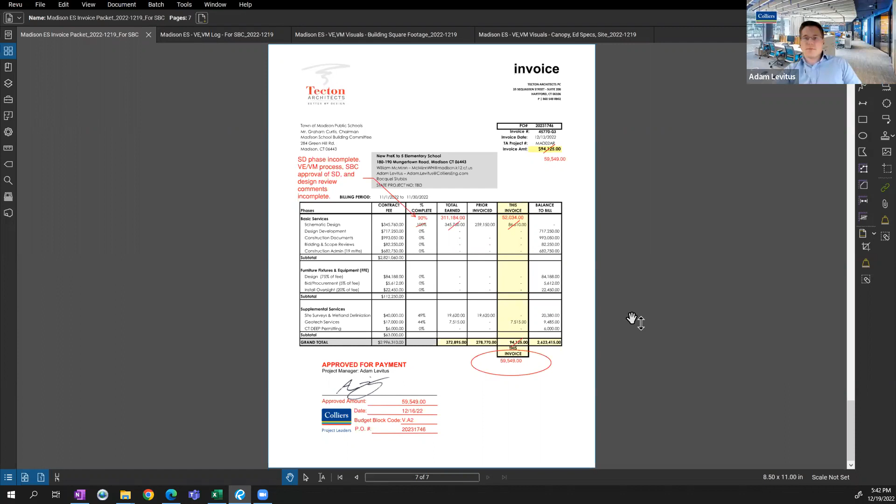Adam, why was the amount approved lower than the amount applied for? That's a good question. So with Tecton's bill, their accounting staff originally billed out 100% of schematic design, but we're not all the way through schematic design yet. I spoke with Justin last week, and we're approximately 90% of the way through. So that's why the amount submitted was different than the amount approved, to align scope with completion. Great, thank you.

Do we have, would someone like to make a motion to approve? Is George here? George, where are you? We need a voice. I'm here, but I don't have the draft. I'll make a motion that we approve. Oh, I have it, I can share the screen now if you want. Okay, Woody, go ahead.

Once you stop doing that, I'd like to make a motion to approve the invoice packet dated 12/19/2022, including invoices from Colliers Project Leaders and Tecton Architects for a total approval of $76,274. Do we have a second? I'll second it. George, beautiful. All in favor? Aye. Aye. I think that was unanimous. Sharon, did you raise your hand? Yes, unanimous. Okay, great. So with that, I guess we'll double back to the OPM update.

You guys are gonna tag team this? Yeah, so this basically is just, there's not much of an update—it's just the schematic design and value engineering and management review.

The ultimate goal of this exercise is to move from schematic design to design development. The two tasks that comprise that include confirming that the concept behind schematic design, with any of the changes discussed, aligns with the town's needs and conforms with the education specifications—that yes, this is the project we want to move forward with.

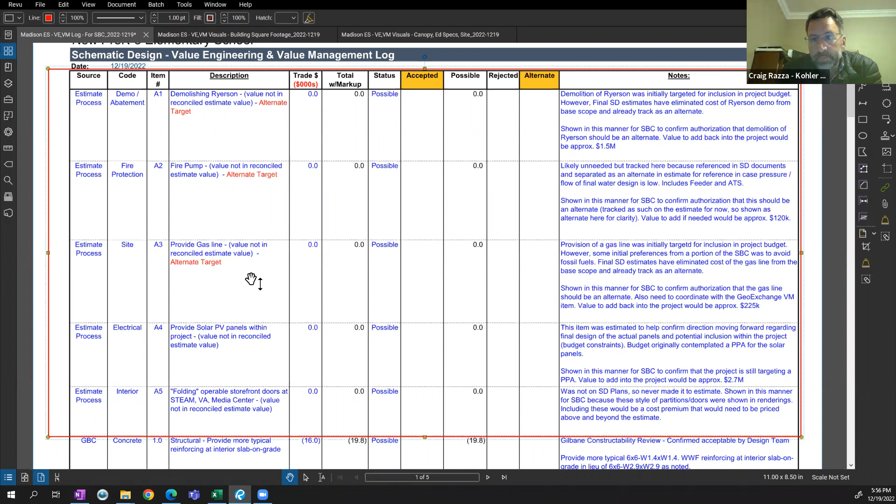Thanks, Craig. Also on these five, otherwise I'll allocate them accordingly. We can move on to the other VE items.

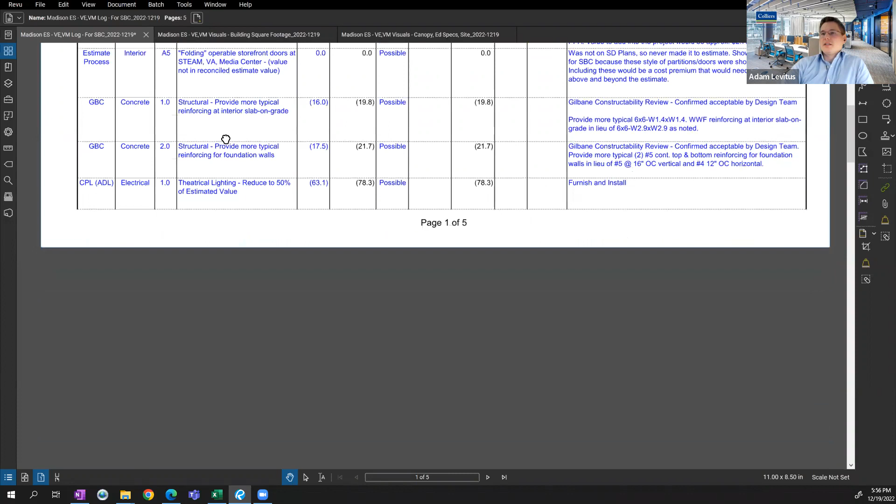So the first item to take up is this couple of concrete items and an electrical item. For concrete, there were some constructability comments from Gilbane that some of the reinforcing in the plans was a little more robust than they typically see. Tecton indicated that was probably the case, so this was a fairly safe value engineering item that could be taken just on reinforcing within the concrete standpoint, in the slabs as well as a similar comment on some of the foundation walls. Any questions on those two?

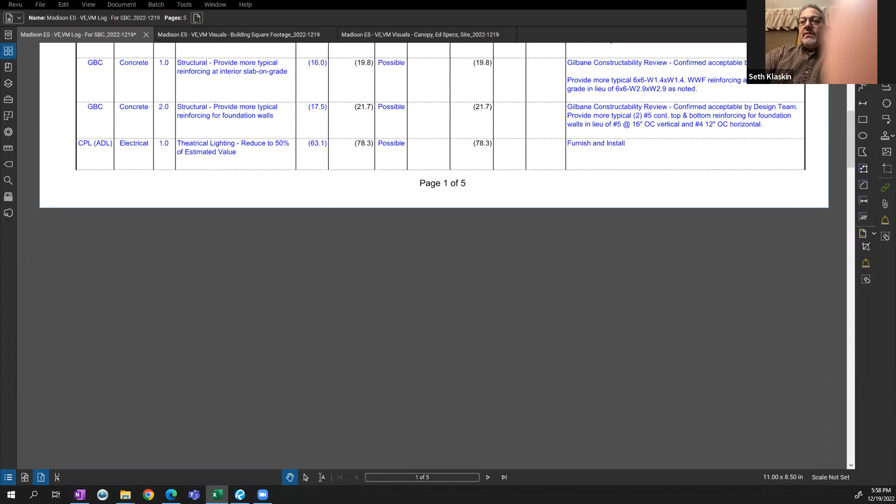The board did at its last board meeting entertain a discussion about the potential for opening up and potentially amending or revising the ed specs. While I'm sure the board would still be willing to do that, I think we'll need to take a wait-and-see approach until some of the town leadership talks in the coming couple of weeks, to see where things stand, because through some of the things Graham hinted at, and maybe some other initiatives, there may be a way to close this gap without hitting the ed specs. So if we need to hit the ed specs, I think the board would be amenable and probably able to move an action item in time to address that need. But until that's clear, I don't want to overcommit the board, because there may be new information coming that we were not privy to during our discussion.

Absolutely, 100% agree. That's why we just preliminarily came to you. Well, any thoughts on the radiant flooring?

I know there was quite a bit of discussion. Do you guys have a consensus on that? As far as I'm concerned, as of now, everything that has already passed as ed specs by the Board of Ed, that's our ed specs. And if that includes radiant flooring for younger kids who spend a lot of time on the floor during lessons, then that's what it includes. I'm not so quick to dismiss that personally, but other board members may feel differently. Either way, we would have to have a BOE vote on that, and the same thing on square footage of kindergarten classrooms, for example.

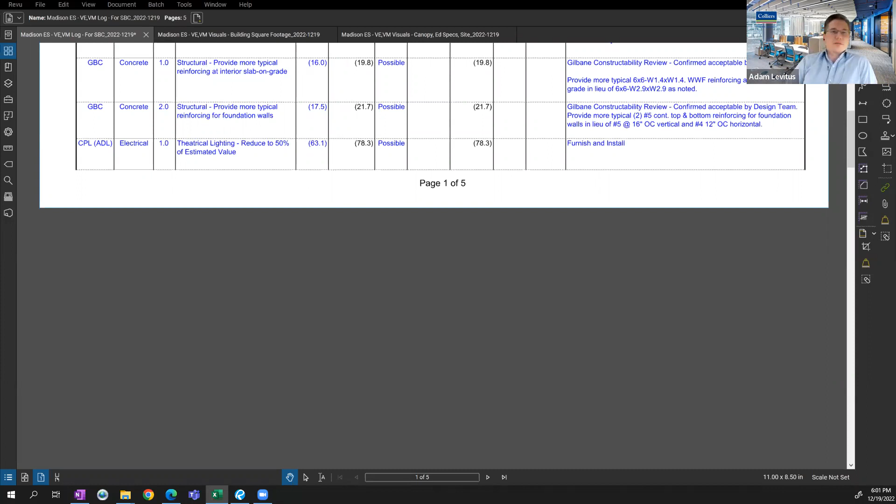And just to piggyback on that, the way this may work depending on timing of meetings is an understanding from the SBC where if any value engineering items were to be contemplated, there could be a conditional amendment to that vote, conditional upon BOE approval of those specs. That way it's clear and we're not just going back and forth between committee meetings for weeks and weeks. Ultimately this is timely, so getting Tecton direction to move in one direction or another with the reduction in classrooms or not is important. But to Seth's point, the ed specs can't be changed without BOE approval. So getting those ducks in a row and making the appropriately worded motions is a good mechanism to ensure those sign-offs are made without anyone being circumvented in the approval process.

Anything else on that before I chop that to the list? Nope, I'm good. Thanks, Seth.

All right, so any questions on those two concrete items? Otherwise I can list those as targeted for acceptance unless there's exception.

Next one is a theatrical lighting item. The theatrical lighting value in the reconciled estimates was in the neighborhood of $120,000 of trade costs. So the idea would be to target the design to 50% of that value. There's not scope to cut necessarily at this point, so the design would contemplate approximately $60,000 worth of lighting.

Questions or concerns there? I guess the $120,000, it's an elementary school, so I assume that reduced number is suitable theatrical lighting for an elementary school. Correct, this is Justin from Tecton, yes. Okay, good.

Next, another constructability item where there was some rigid conduit noted in the design documents. EMT tubing was a little more typical and cheaper, so that was an item brought up by Gilbane and acceptable to the design team, for mechanical spaces and that kind of thing. Hearing no questions about that.

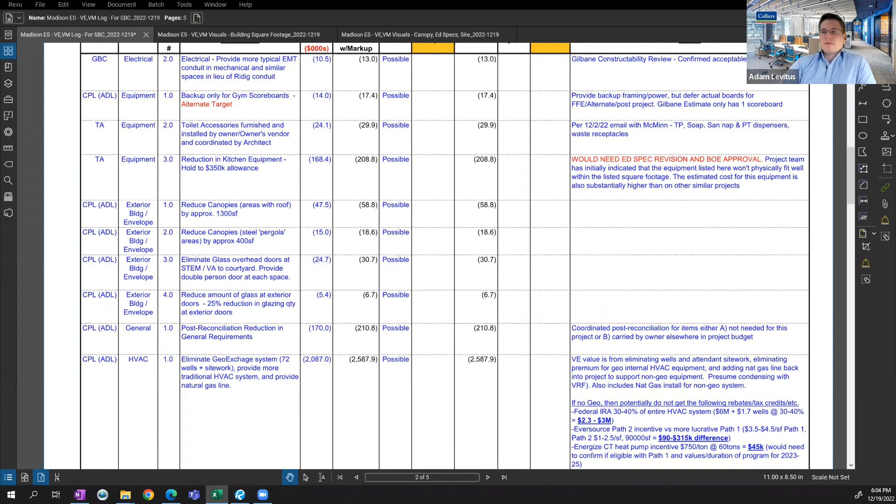Sounds good to me. Okay, I'll put that in the alternate category.

This next one is coordination between myself and Bill McMinn about some of the toilet accessories, dispensers for soap and paper towels and things that are often vendor specific rather than designed and provided for through the project budget. Bill indicated that a number of items would be going through the town anyway, so wouldn't be part of the construction budget itself. So this item is more a clarification rather than a value engineering item of where the monies would be coming from for this scope.

Questions there? No? Okay.

The next one would be one of the four that would involve potential ed spec revisions. This is for a targeted allowance of money for the kitchen equipment. The ed spec had a number of components to the kitchen equipment. Let me see if I can pull up the ed spec for this.

I don't know how well - you should be seeing the ed specs now. Is that correct? Yeah, correct. So all of these items were listed in the ed specs, and when it was priced out, it was a little over $500,000 worth of equipment.

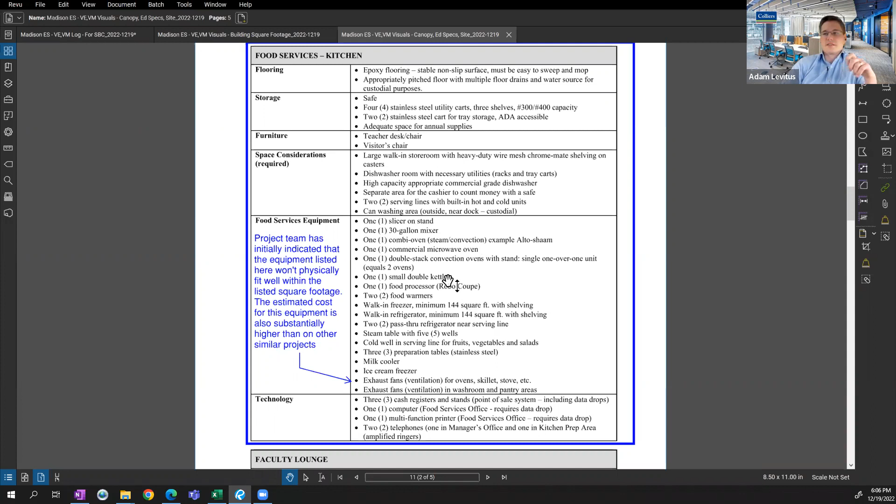On similar recent projects, $350,000 seemed to be a better target for the amount of equipment that would go into the job, and that shown through in some of the estimate reconciliation processes. So that is the target for this value engineering item - basically to save on the difference and design the equipment to match that budget, which would be done in concert with town facilities and town staff. But again, ultimately would change the ed spec in terms of what would be provided.

Is there a cost difference between induction cooking equipment and gas-fired cooking equipment?

That might be a better Nick question, or Jeff or Justin question. Not 100% sure on that, Graham. I can look into it and get back to you.

Got it. If some of the equipment won't fit anyway, we have two problems. So besides the ed spec, we have a physical 'this won't fit' problem, don't we?

Yeah, I think we're probably going to take this one unless someone - if the kitchen, I assume we have a kitchen consultant on the team. We don't know. Yep, I don't know if they've weighed in. I assume they think the reduction is reasonable for an elementary school of this size.

The answer is yes, they've been involved in the value management. They understand that it was an awful lot of equipment to fit into the space that was given, and they think they can design a performing, operating kitchen with less equipment.

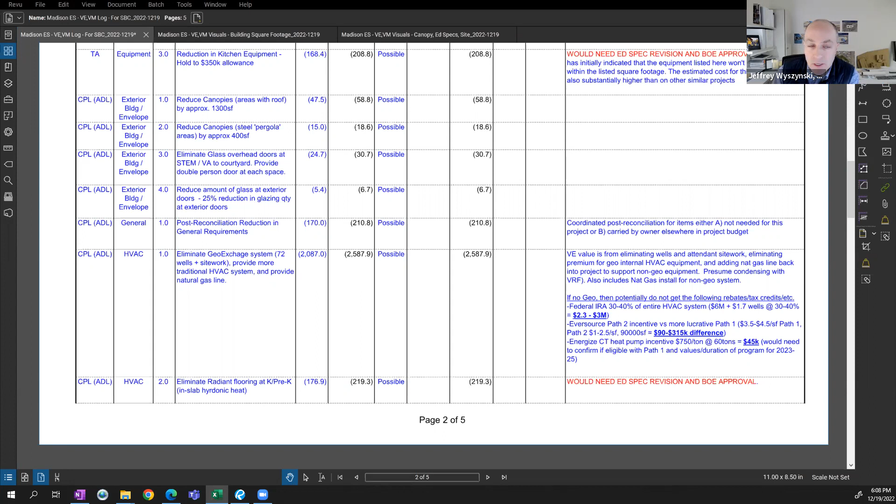I think the budget numbers were sourced from a variety of different previous recent projects that were similar size. That's why we came up with the 350. Perfect. Yeah, the origin of the kitchen list in the ed spec was a pretty detailed list.

And it is amongst our next steps to validate this with the kitchen food service folks in the district. So that's something that's on our radar to schedule and validate with Bill and his team.

I have a question - is there any reason we can't move any equipment over from Jefferson that we already own? Does it all have to be brand new?

I mean, I don't know if you know. I can answer that. I don't think - the equipment that's there is probably some of the original stoves and stuff. Now we have been taking care of it and maintaining the equipment, and we fix and repair it all the time when it's needed. But I just don't think that's an option we'd want to do.

Plus it's gas, right, Billy? Right. Yes, a lot of it was propane. We did put gas there - I don't know if we converted it to natural gas, but it's originally been propane.

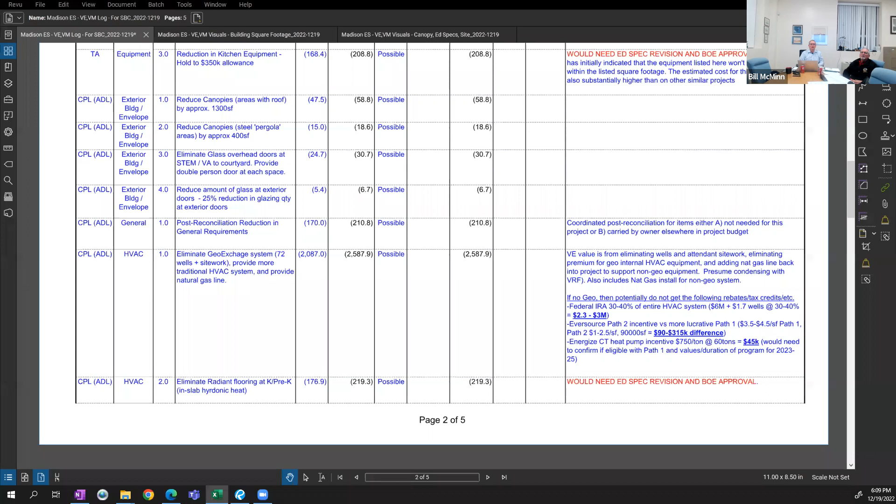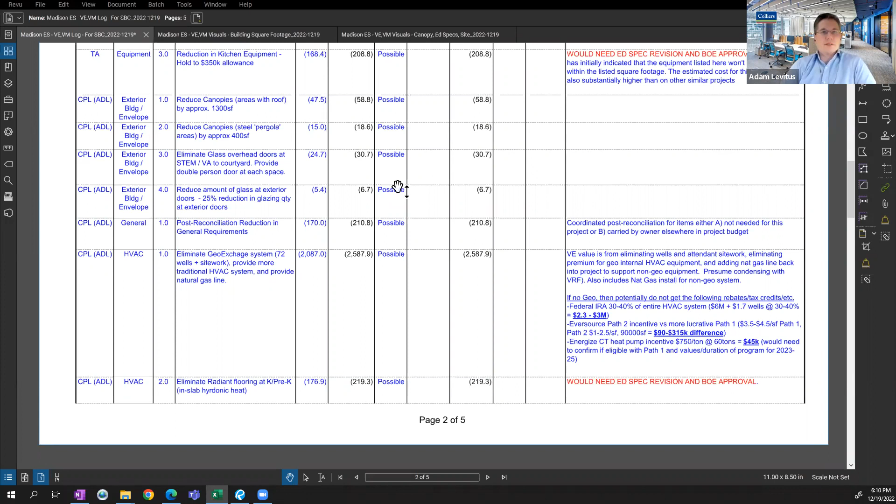Is there any exception to this item from this committee standpoint? This item would need some coordination with the BOE as part of the ed spec potential changes. But from a value engineering budgetary scope standpoint, is there anyone with any exception to this item? Otherwise, I can flag it as accepted, and it would need to be coordinated through the BOE separately. I think that's a good direction. Yeah, yep.

Very good. The next item, or two items, are with regard to reducing the amount of canopies. I'll share a quick visual here to help with this scope. So everywhere in the blue shaded around the building is some fashion of canopy or sunshade.

Tecton took a look at what was originally estimated and identified about 1,300 square feet of solid canopy, and then 400 square feet of more pergola type canopies up in the front that might be eliminated, both because it can still work without it, as well as just a cost saving effort. So this is where that targeted area was that related to those two savings items.

If I can add, Adam, this was actually a design element that we had already incorporated by the time it became a value management item. We develop our drawings up to SD and then go through a period of cost estimation. As we were continuing to work on the design and the project, this was an item that we had already incorporated. But it's an item that has been identified as part of the value management, so we recommend you accept this item.

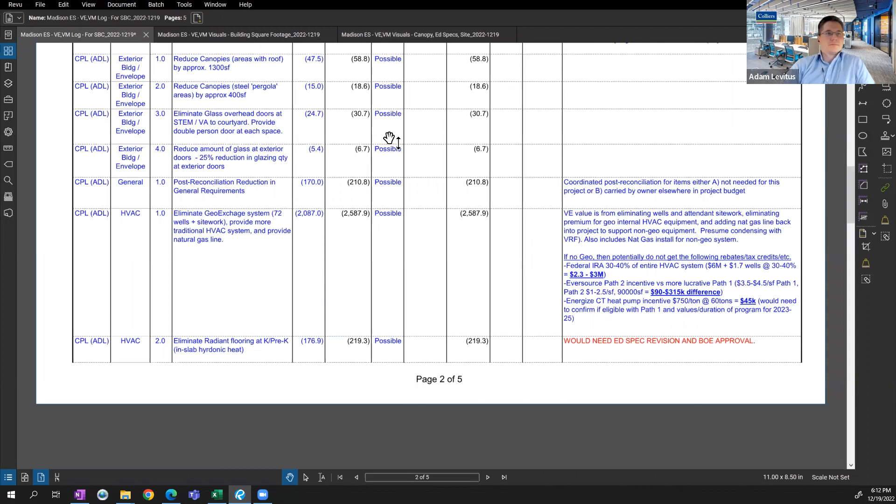The next item is glass overhead doors at the STEM and the courtyard, replacing them with a double person door at each space. Originally anticipated at these two areas was a sort of a roll-up door to facilitate access to the outside. This VE item would maintain access to the outside through standard double doors to get out in each space rather than having the premium overhead roll-up door.

Questions on that? Concerns? Would that be an alternate? If the architects feel strongly about it, it's a nice feature, but let them identify if it's something they want to design or not. Probably don't want to draw it twice though. I mean, it depends if they feel strongly about it. Was that item in the first five items too?

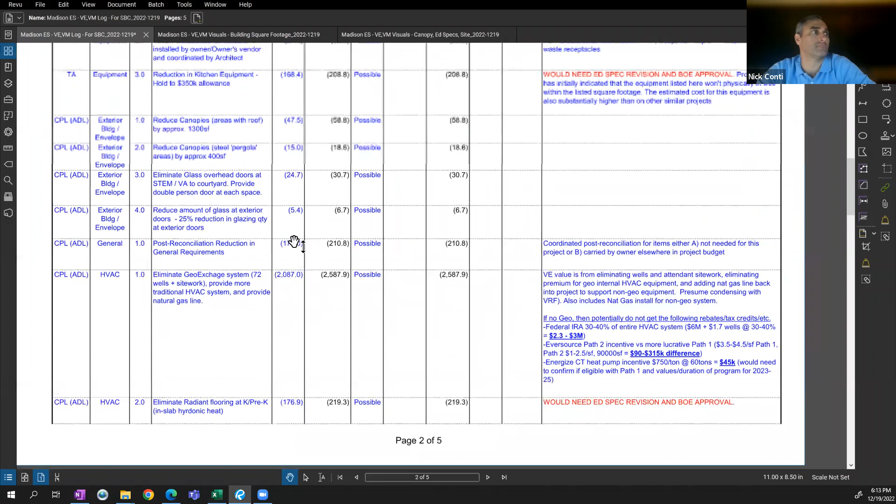Yeah, Adam, if you go up to item A5. That was a different one, I think. I'm sorry, I see your point. So this current B item refers to these two. Item A5 was at these two locations where the SD drawings just showed storefront, but some of the later renderings that came out right after SD showed the full bifold doors to open up the spaces. That's what A5 was. Got it, thank you.

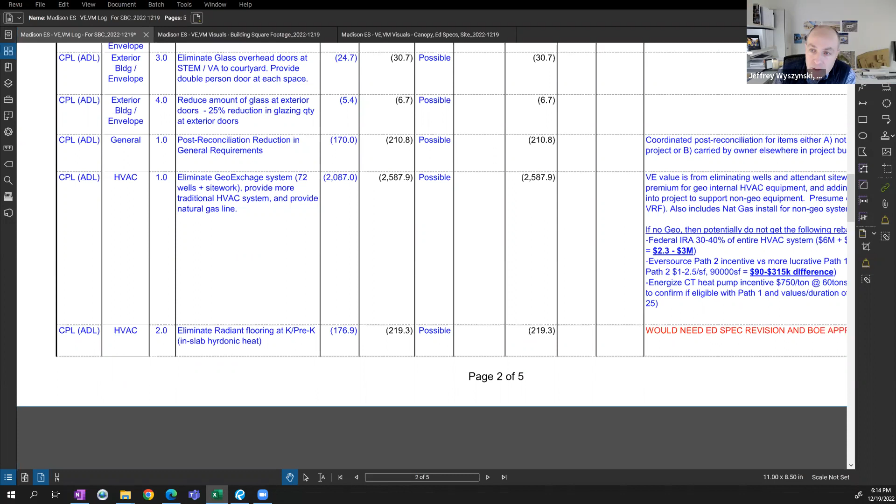Any other questions? Jeff and Justin, do you want to talk about it being an alternate, or is that something that should be taken sooner rather than later? It certainly could be an alternate. It's easy enough to change the function. We can talk about that later in DD, but for now, moving ahead, we'll just show it as doors as a VE item. Works for me. Yep, okay.

The next item is reducing amount of glass at exterior doors. This is one of the first of a number of items where there was a targeted reduction in percentage rather than a wholesale elimination. The notion was to not completely gut the building of every single window and finish. Some items are more extensively taken; one of the later VE items is a 100% elimination of wood ceilings. But obviously, having zero glazing at your exterior doors isn't nice to have. So you'll see a number of these with a percentage basis to try to offset square footage reductions, having a smaller building with nicer finishes versus a larger building with nothing in it.

Justin, it's an awfully small number, isn't it, to worry about at this stage?

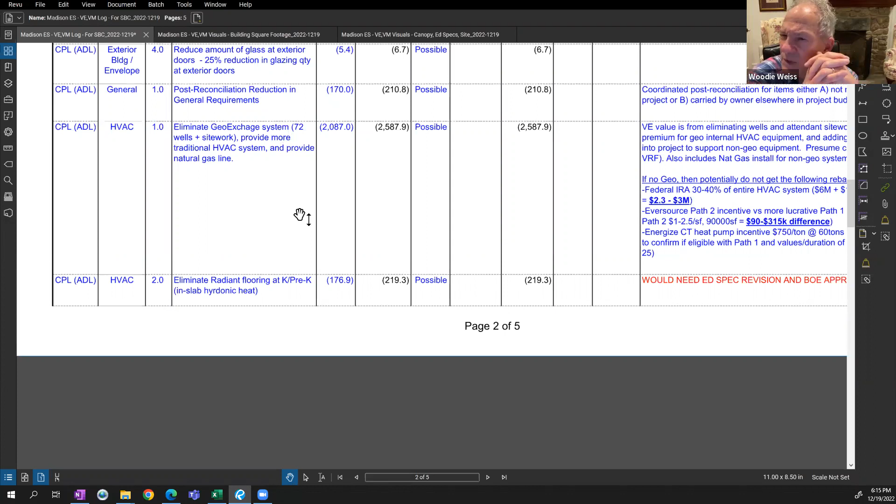Justin, can you talk about what glazing currently is at the doors? Yeah, it's a matter of each door basically having a storefront type door that more or less has a full pane of glass within the door and side lights. There are some select exterior systems, perhaps on the north side of the building, that we can economize. We can also incorporate perhaps a

larger bottom stile in the doors and in the side lights. So this is something that, frankly, as we move forward in design development, we'll have more elevations to evaluate this in. So it seems like an easy get, something we'd likely be doing anyway. We didn't know the cost value when we developed it, and it came through at a lower value than we thought, but that's why it's on the list - we didn't want to start taking things off just because it was a smaller value.

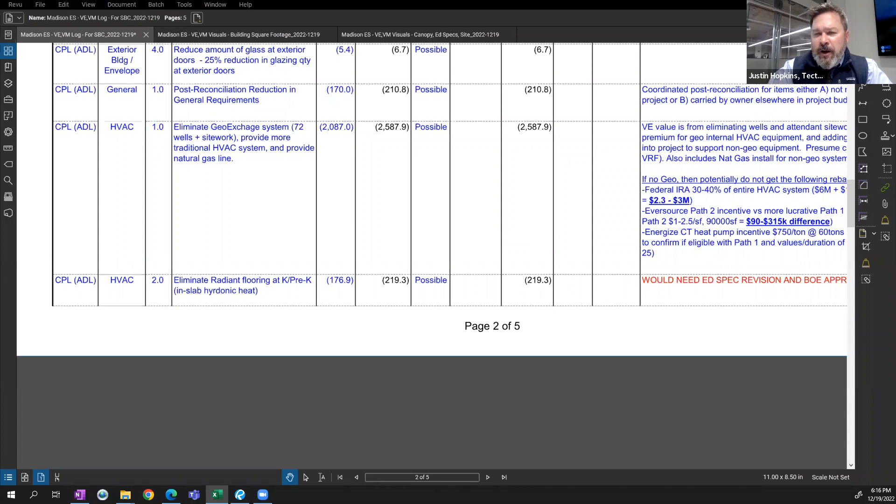Does this reflect ballistic glass or security glass premiums? Well, certainly any glazing that we have at grade and at doors is going to have an additional enhanced glazing there. So I think this is more about reducing the size of glazing so that you can then reduce the cost associated with it.

Yeah, I understand. I just wondered if it was a premium, would there be more savings if it were priced as a premium. Yeah, that number might be a little bit low - 6,700 for ballistic glass, 25% reduction. We can take another look at that. Thanks. What I'll do is leave this one as possible, and since we have to come back anyway, we can see if there's a reconfirmation of that number.

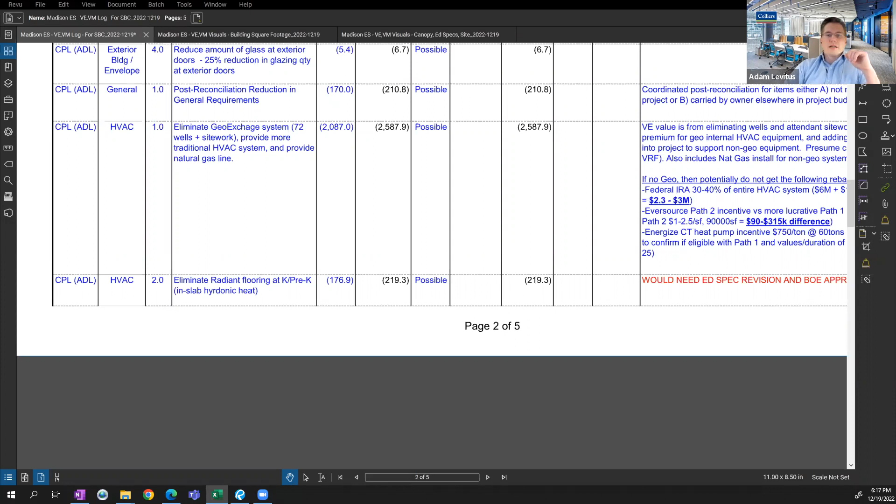All right, next item. So this one should be fairly simple. There was some general requirements identified in the estimate process. This reflects a lot of the administrative stuff that Gilbane will incur as part of running the job. So Nick and I took a look at it, and there were a number of items that either didn't need to be applicable to this project site or were carried elsewhere in the budget on the owner side of things. It just happened to surface after the estimate reconciliation. So that's what this line item is - there's no change in programming or scope, it's more or less just identifying where savings is coming after the reconciliation number.

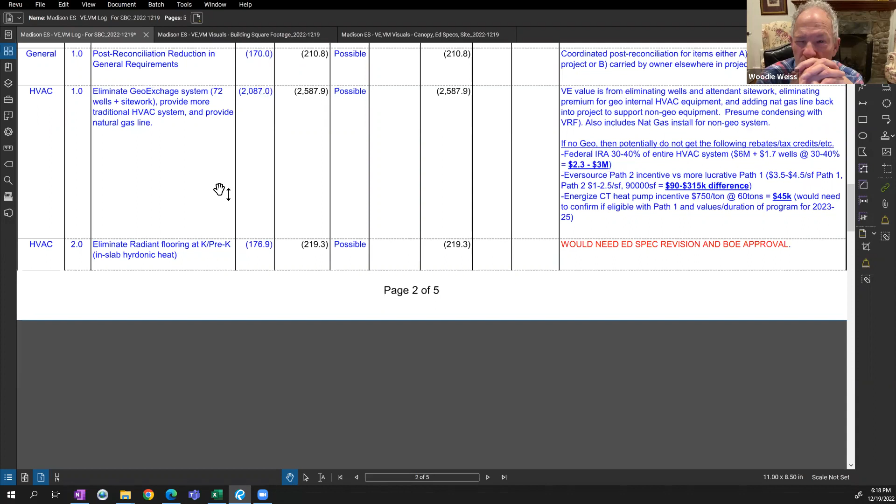You get any more like that? If you got a few more like this, Adam, feel free to throw them out. I would love to, but I don't think Nick would be too happy if we do more of these reductions. Any questions on that? Otherwise, I'll move that into the accepted column.

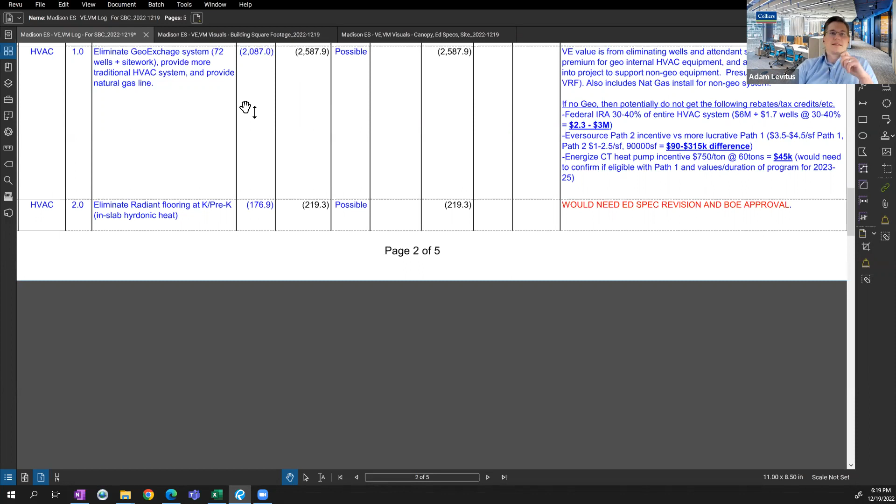Okay, our first big one here with the geothermal. Obviously there's later discussions coming up insofar as potential budgetary items, but from a very high perspective, this number contemplates eliminating the wells, eliminating the attendant site work, the manifolds and piping going to the building, changing over the internal HVAC system units to a more traditional system - those are the savings portion of it - and then the putback includes the value for the natural gas line to feed a more traditional system.

The other side of the coin to this is if this number, which is a big number, is taken, that would eliminate a lot of potential for grants and things coming down the pipe - several million dollars if the programs from the federal government and Eversource hold true. So that's the crux of this topic: whether or not the project can have sufficient funding within it, or within the overall referendum budget, to get the additional monies to help support this project value, or whether that's not possible through bond funding and would need to be considered as a VE item. Adam, I think it's important to have the IRA money indicated as a rebate rather than

a grant - it's not a grant, it doesn't have to be applied for. And I think that's a real difference to people that do grant writing, who say oh, there's a lot involved there and maybe we won't get it. This is not something, as we discussed in our last meeting, that there's any ambiguity about any longer. Therefore, I think we should say to people: the differential between a conventional system and the geo-exchange system is zero or very close to zero, because the IRA is a definite. And if we use American-made equipment, then we can bump the 30% up to 40%, and then it's cheaper than a conventional system - to say nothing of the fact that it would save 60% of the expense of operating the system compared to a conventional system.

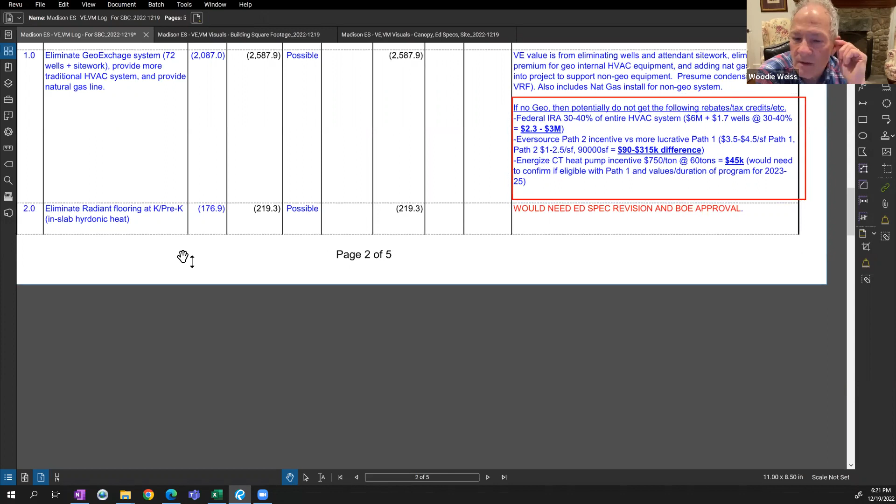I hope the meeting tomorrow goes well. Obviously I'm very hopeful that it goes well. If it doesn't, I think we need to think as out of the box as possible to get people to recognize that it is, in my opinion, totally irresponsible to not put in a system that the federal government is willing to pay us for, to make the cost the same or similar to a traditional system that has the benefits I've just outlined.

And there's got to be some way, pull other stuff out, do other things. I'm sure you're expecting this kind of response from me, so it's not a surprise. But if tomorrow's meeting doesn't go well, we shouldn't be taking this off the table so quickly. We should really, really exhaust every possibility and see what else is available to do.

By the way, Craig, we're talking about more than 60 tons here, aren't we? That number I just pulled from the narrative that I saw within the estimate. So it might be, in which case that number would go up. This is intended to be just approximate values.

Obviously, we haven't applied for the rebates yet. I don't think though, if you get one incentive, you can't combine the other. So if you go for path one, everything is in that incentive. I don't believe they incentivize again.

Right, that's why I have this little note here. I wasn't sure what the result was, but point being, to Woody's point, the federal money is multiple millions of dollars, and we know through Eversource conversations that path one is somewhere between $90,000 and $315,000 more than if we went down path two without geothermal.

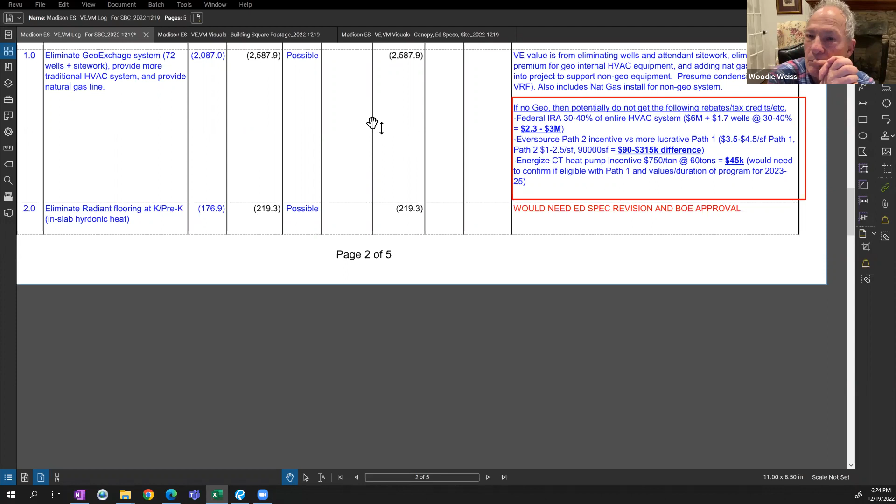So obviously this topic is not going to be resolved tonight, but just as a point of note moving forward, maybe Craig and Jeff can talk about this as well. This is important to resolve before we move headlong into design development or the rest of design development. We can't sit on this with a wait-and-see approach until construction documents and then find out we have to change the entire mechanical system and all the distributed mechanical rooms and redesign everything.

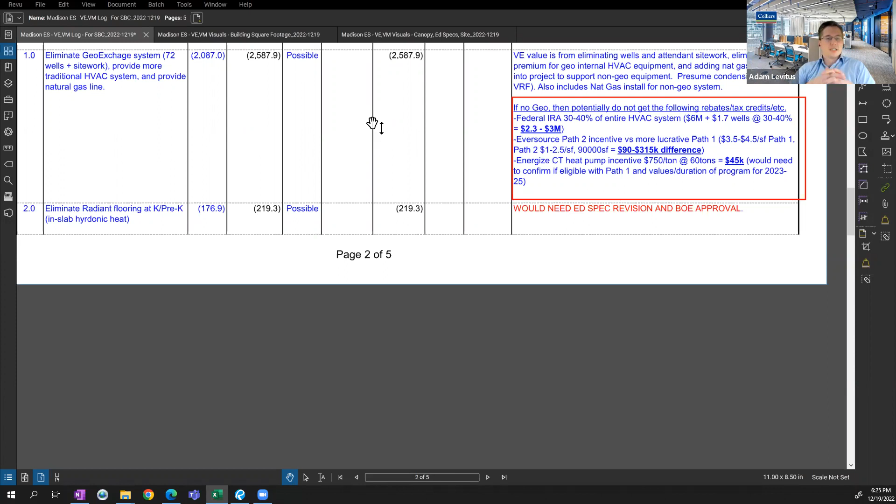That is 100% correct. You're not designing two buildings for the price of one. No. Understood, we got this — this is a critical path.

All right, unless there's anything else on this topic, we can probably move on to some of the other ones we can review. I'd like to make sure, and I don't want to slow you up Adam, that the other members of the committee and any BOE members understand what we're dealing with here and why I'm so obstinate about it.

I'm crystal clear, Woody, after working with you for 5 years. Yeah, I didn't mean you. But anybody else, and for George likewise, is crystal clear. I don't know if anybody else is unclear, but I will make an impassioned plea tomorrow in your case, Woody. But no need, everyone knows — you've preached long enough to Madison. They, everybody in town, understands the issue here.

Okay, thank you. We'll do everything humanly possible to go above and beyond whatever we need to do to make this happen. So.

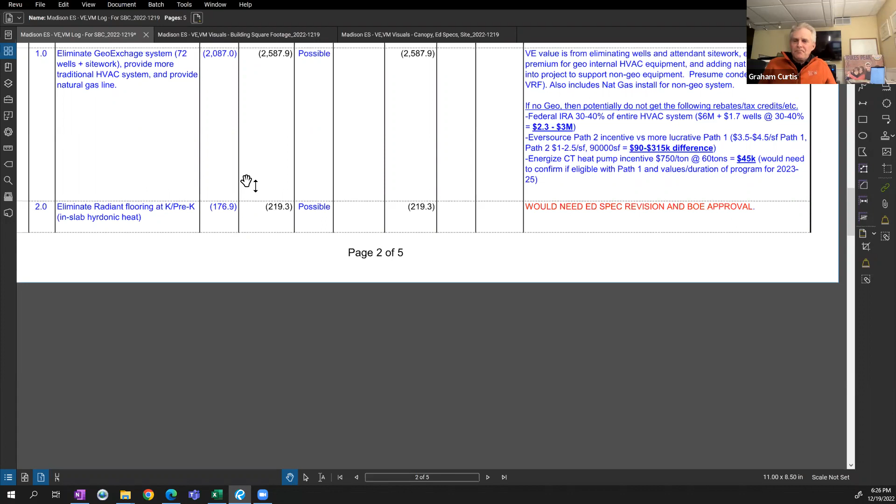Okay, next item, which is actually one of the 4 items that would be an ed spec revision, is the radiant flooring at the kindergarten and pre-K areas. Basically, it would just be heated through the normal system rather than the in-concrete slab radiant hydronic system. That would be a couple hundred thousand dollars worth of savings.

Well, I agree with Seth about that personally. I mean, obviously, if we're out of money, we're out of money and we do things, but having those kids sitting on a concrete floor, expecting hot air to go down instead of up doesn't make a lot of sense to me.

It is just for the younger grades, correct? Kindergarten, yeah, pre-K and K, yeah. Correct. Correct.

Okay, I will, because this is also one of the BOE items, and there's a little bit of uncertainty about this one. I'll just keep this one as possible, and we'll revisit this when we come to the later meeting. Perfect. All right, moving on.

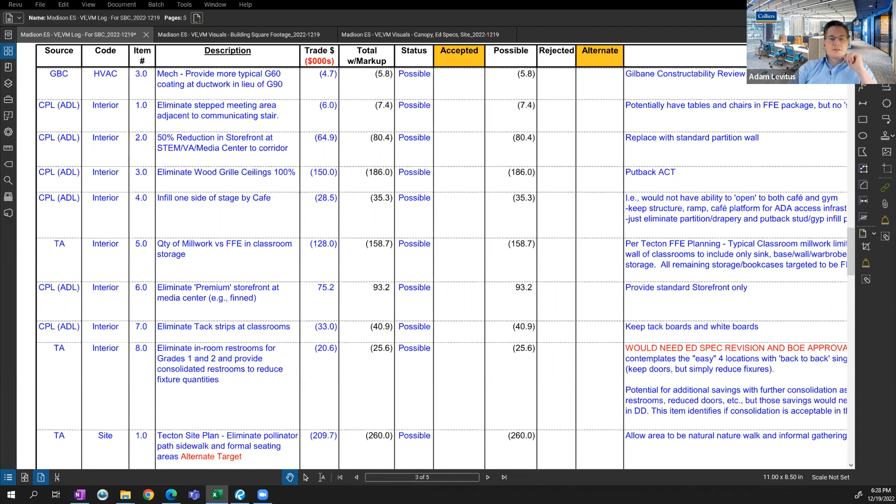I'm good. Next, this is an item. It's a little bit smaller, so this one might be a little more scrutinized. This is for the stepped seating area adjacent to the communicating stair, the actual stairway to get down from the upper floor to the cafe area. What we're talking about here is this millwork area, with larger steps for students to gather and sit. The number isn't quite as large as I thought it might be when it was originally suggested. So the alternative would be an FF&E solution, but that's up for the committee's consideration.

I like the feature. I have some question if it's an ADA issue, whether people in wheelchairs can't access it, but that's a separate kind of issue.

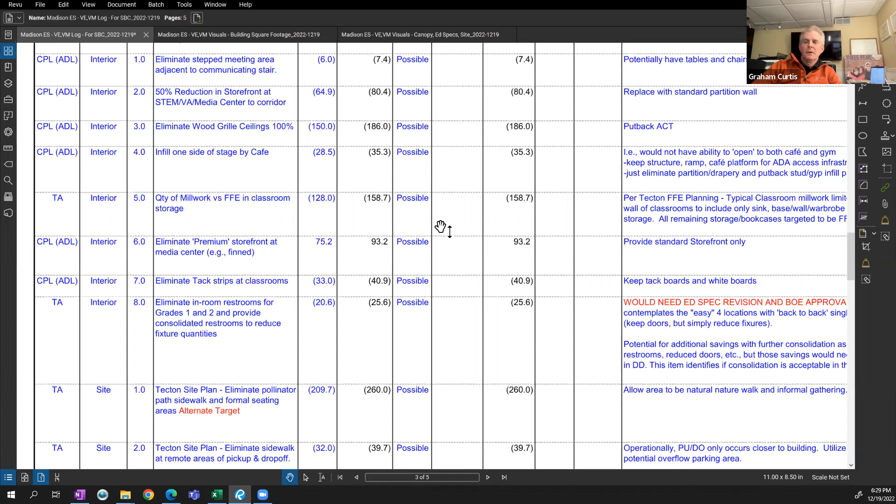That's Justin, do you have thoughts on that? Yeah, I mean, we design these types of communicating learning stairs in a lot of our schools, providing accessible seating area or accessible areas at the bottom of the feature is an acceptable ADA solution. We just need to make sure that we have designated areas for wheelchairs to be able to be part of that assembly.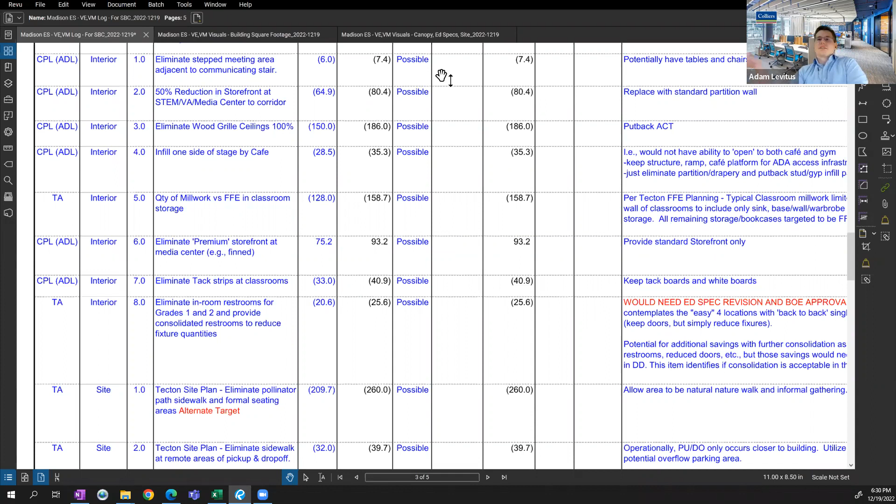I also, just as an aside, have heard from other sources that this might not be the most favorable VE item, and given its low value, I'm not sure what Tecton feels about potentially waiting until CD if it was really necessary to have this $7,000 item. But I don't know, you know my feelings on it. Yeah, so if the committee wanted to keep this value, at this point I don't think 7,000 is going to break the bank at SD phase.

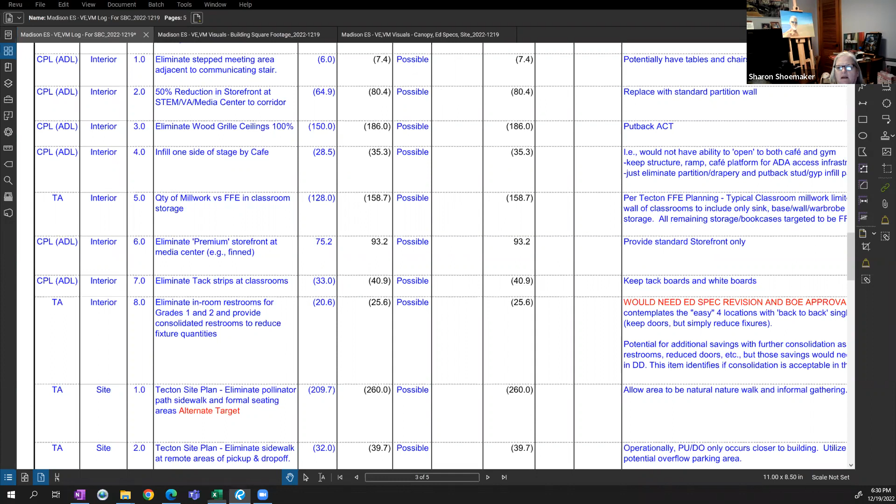I'm leaning towards keeping it. I think it's a really nice feature that would be utilized a lot by the school, and I do think it's pretty minimal. Thoughts? Otherwise, I'll mark it as rejected and we can go on to the next one. Yeah, that's fine. Perfect. Yeah.

One of those wild spaces for $6,000. I can see it in the photographs already. We'll put a plaque with your name on it, Graham. Yeah, when we get to the naming opportunities, keep me in mind.

All right, the next one. Justin, have you guys talked to other schools about their usage after you've put them in? Yes, we have. It does take a little bit of educational commissioning, if you will, to talk about how to use them, the intended design, but we do see them used quite a bit in kind of project-based learning opportunities. So yes. Would imagine so. Thank you.

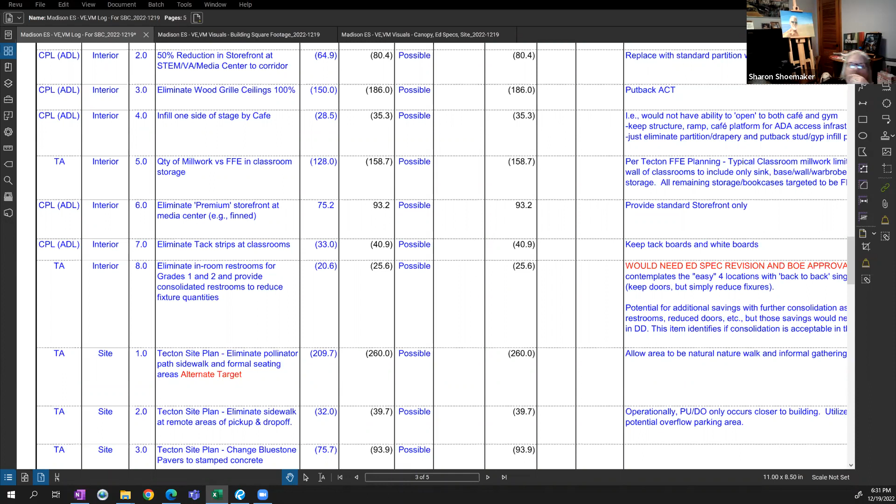Okay, next one is a reduction, 50% reduction in storefront at the STEM Visual Arts Media Center corridor. So effectively this corridor - the item, one of the top 5 items I talked about, was that these were bifold doors. This VE item is that half the storefront that was bid would be replaced just with gyp wall.

So is that still looking over the cafeteria side as well, or just the corridor? Just the corridor. There is a topic in a couple lines here that will deal with this, but we're not there yet. Okay, sorry. No, there's a lot of these items. That's why I wanted to show the visual, because it can get confusing.

So Jeff and Justin, chime in, but I believe this would still maintain at least an initial visual into both spaces, so it's keeping that open sort of feel, but some of these later panels would be removed. Is that the intent? Yes. Yeah, I still think we can achieve kind of the original mission with some reduction.

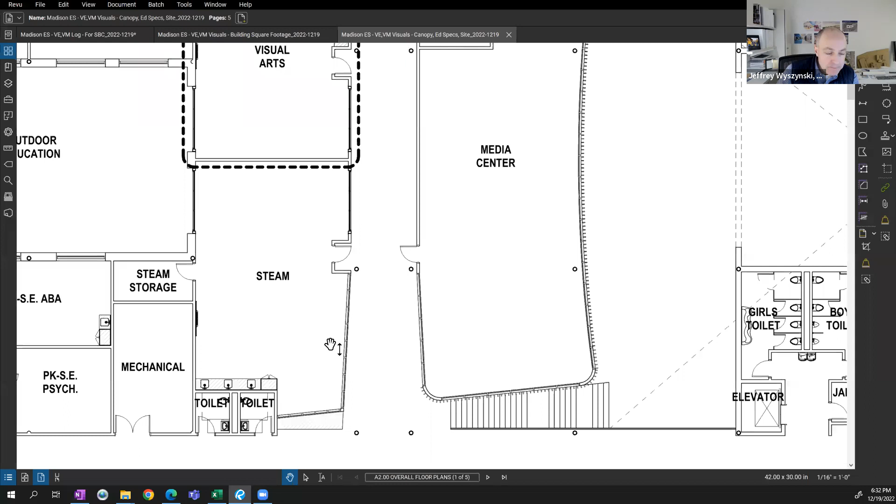Thoughts, concerns? Otherwise, can I mark this as accepted? I'm good. Yep.

Next one. This was the one item that was targeted as 100% elimination. It was a big dollar value. It was wood grille ceilings.

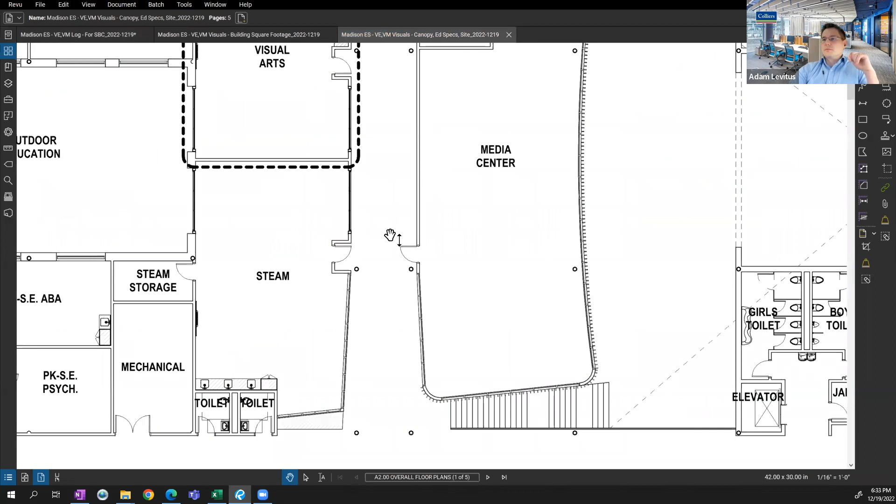Justin, Jeff, where were these predominantly targeted and located? In the public areas, in the kind of two-story spaces. Now, this is on a conceptual level, we had indicated this in the basis of design, so it's more or less in those locations: entrance, the areas over the cafeteria, some of our wider corridors, etc.

So understanding that it's a premium, we can take a look at it. We would still advocate a portion of those areas to be specialty ceilings, but we can likely take a look at economizing the total breadth of them.

Well, I think this eliminates them, correct? Yeah, yep. But there are other alternatives you can use for specialty ceilings, though, correct? Yes, they'd come at a premium, but there are less expensive, more economical ways to get an accent ceiling, correct? Yep.

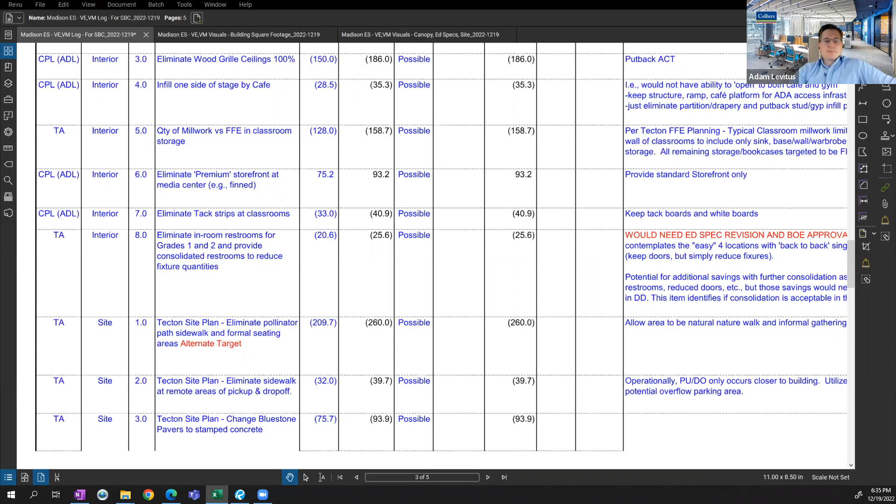Infill one side of the stage by the cafe. So this item would be for the platform here, maintaining the opening and partitions and drapes facing the gymnasium. But the VE item would basically infill this portion of the wall, so you wouldn't have operations and performances to both sides. It would just be solely focused on the gym.

I would keep it as a possible. I think it's a nice feature to have it open, but it's not a super big chunk, but it's a big enough chunk that if we could save it, it'd be nice. In my humble opinion.

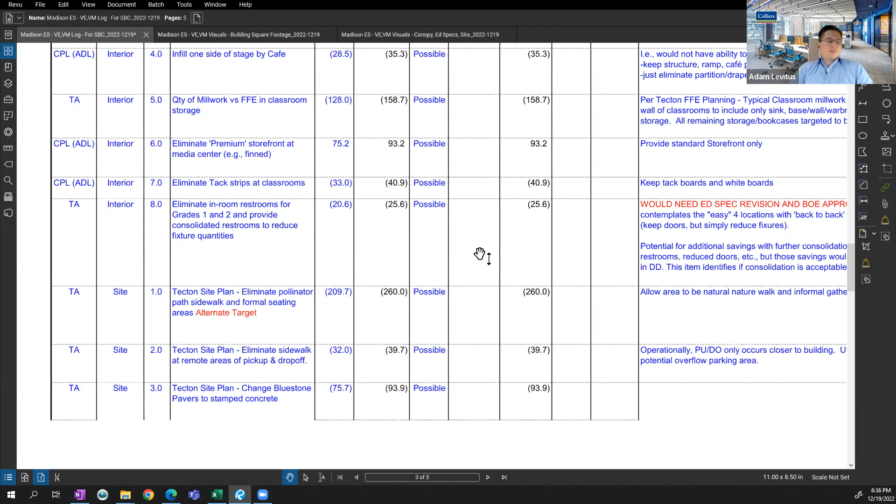Jeff and Justin, some of the items are just drapery specs and the removable partition. Is there any issue with having this be an alternate? No, what we could do is size the structure and put it in, and then if it's not affordable, we can just fill in the wall with regular construction. So that way in the future, if you ever needed it, you have this infrastructure there to do it. So we're fine with that.

Okay, I'll flag it as an alternate unless there's opposition otherwise. Next item: the quantity of millwork versus FF&E.

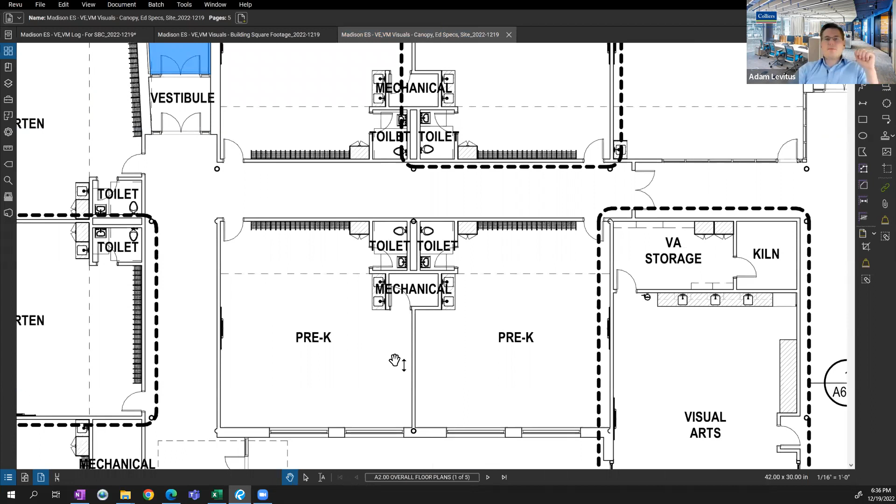This one is more of a clarification than a VE item. In the classrooms, there's typically two rows of storage and items like that. One of the items was storage of bookcases and things, and the other ones were the cubbies. I believe the cubbies and the wardrobe were intended to be millwork, but the other storage items were intended to be FF&E. But in the estimates, everything was millwork, so it inflated the value.

I can jump in here, Adam. Yes, that is the intent, to provide more furniture solutions, to provide more flexible arrangement within each classroom. And per our discussions, that should work within the FF&E budget that's been targeted for the project, correct? We assume so, yes. So again, this one's less of a VE item and more of a budgetary confirmation. Unless there's any exceptions, I'll accept it. We can move on to the next one.

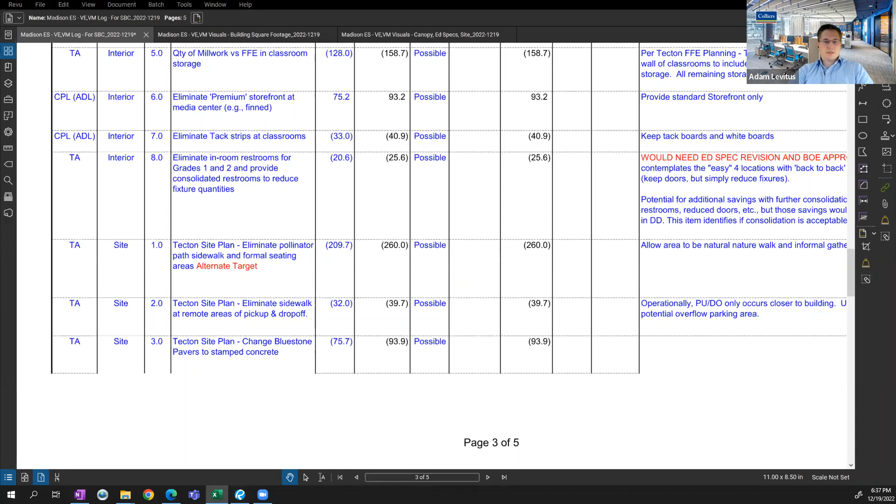All right, next one is the premium storefront at the media center. Going back to the plans, into Sharon's commentary: at the back side of the media center overlooking the cafe, the reconciliation and estimate process had this storefront as a more premium storefront rather than a standard storefront. So the VE effort is not to eliminate the storefront, but to not have it be the premium version of it. Is that right, Nick, with what you guys had estimated? Yeah, that's correct.

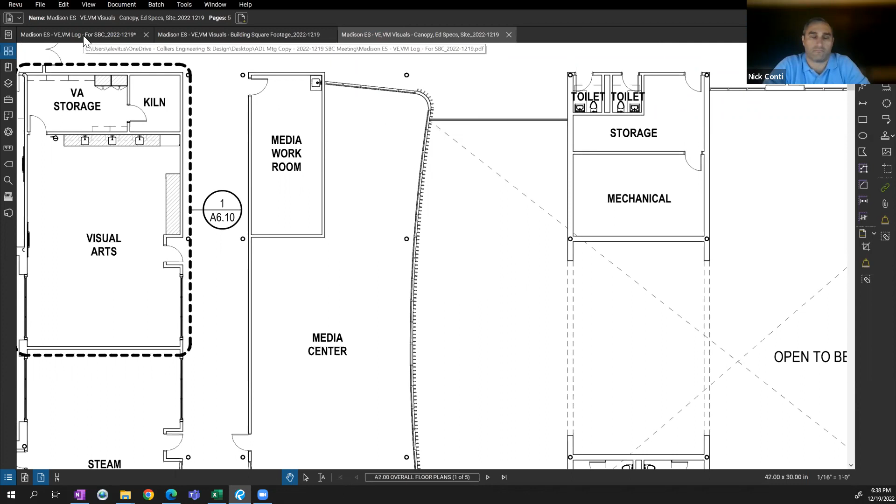Questions, comments, concerns? Does that storefront go all the way down to the floor? Is it to a counter height, so you have case goods below it? Or are we taking away from library space?

So I believe the estimate had assumed that that is kind of floor to ceiling storefront at that location. What we have recognized as the design intent is likely to have some sort of from windowsill height down, some storage, some book and stack storage, and have the visibility from say 36 inches or 42 inches and above down into the cafeteria.

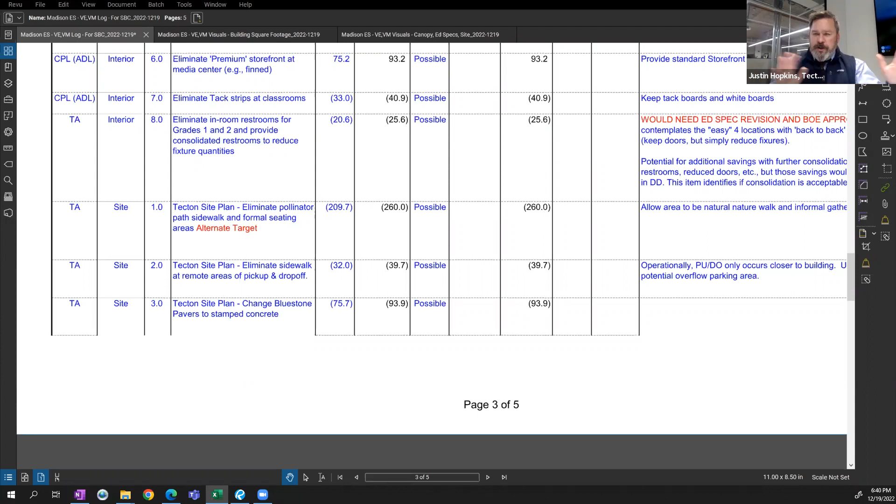Okay, that probably saves some money then too. Yeah, and the fins are at this point, or certainly at the time we were drawing them in SD, were a conceptual notion about having some sort of built-in acoustic treatment that was part of the wall assembly, because that cafeteria double height space off of two separate corridors is going to be a loud area if we do not provide appropriate acoustic treatment within that space. So there's likely a more cost-sensitive solution than what was originally contemplated in the SD package.

Beyond what's represented here, potentially? Yes, well you have to put something back, right? So the decision now is just to eliminate the fin premium, and then there's potentially other savings, but it also might be a trade-off to ensure that the acoustics is right. So for right now, the decision is just on that initial take, and then the design development process can go from there.

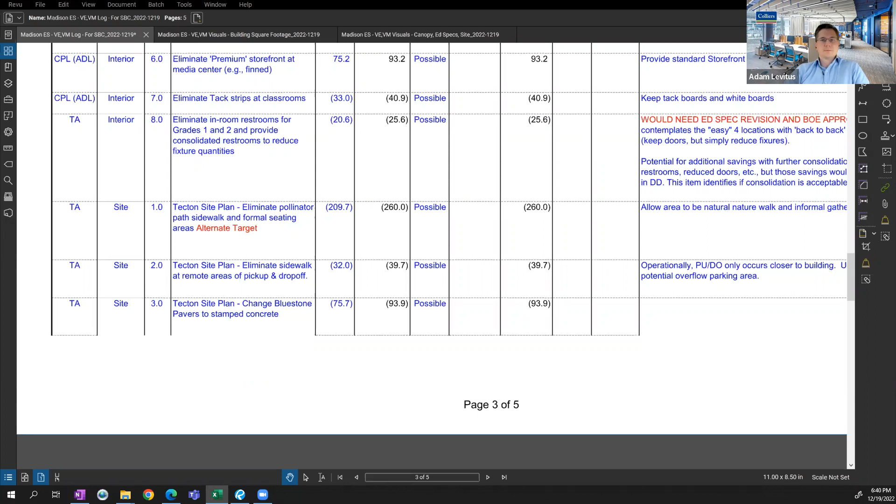Perfect, so I think we're okay to take it then. Everyone agrees. Good.

Next item is for tack strips at the classrooms. There's no visual for this per se. In the estimate, they had whiteboards and tack boards in all the classrooms, but also additional tack strips that amounted to over 40 grand worth of value. So that's what this line item is representing. That's not in FF&E.

Sharon, for those types of items where we want some control over where they're installed and any blocking that might be required, whether or not it's an applied solution or a fastened one, we want the general trades contractor to have control over that installation rather than a split between general trades and an FF&E installer. There are other cases where that would be applicable, for instance any type of wall-mounted monitors or anything like that, but anything permanently fastened or adhered to the wall, we want that to be part of the carpenter doing the work. Understood, thank you. No problem.

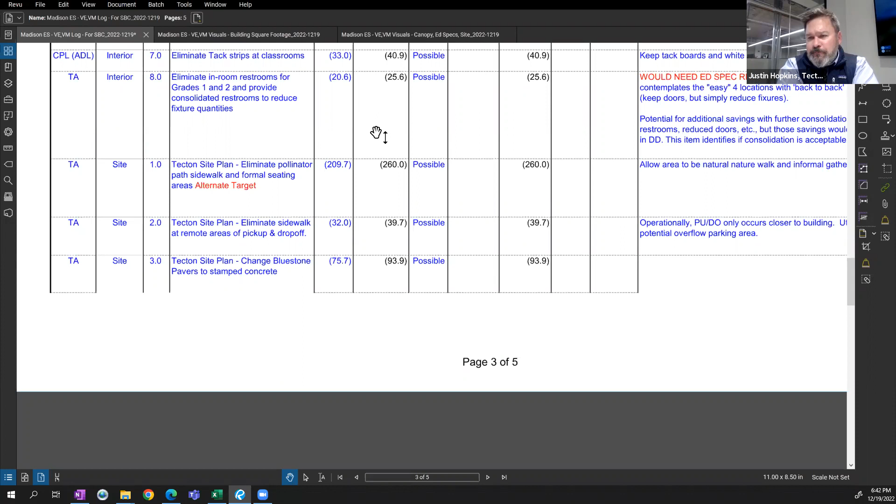Concerns, questions? Okay.

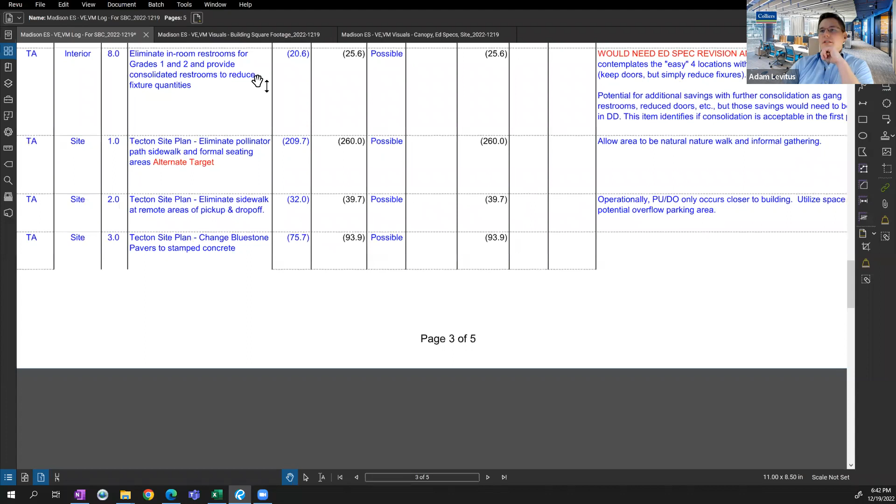Next item, this is the third of four ed spec related components. This one is with regard to in-room restrooms for grades 1 and 2. So I'll pull up the plan here. With your pre-K and kindergarten, they have these single restrooms for the younger students. The ed specs also called for individual restrooms for grades 1 and grades 2. As part of the overall potential square foot reduction for classrooms, which we'll talk about at the end of the list, there was a notion that having these individual restrooms—Tecton has seen this work with alternative schemes—not necessarily having a restroom for each individual grade 1 and grade 2.

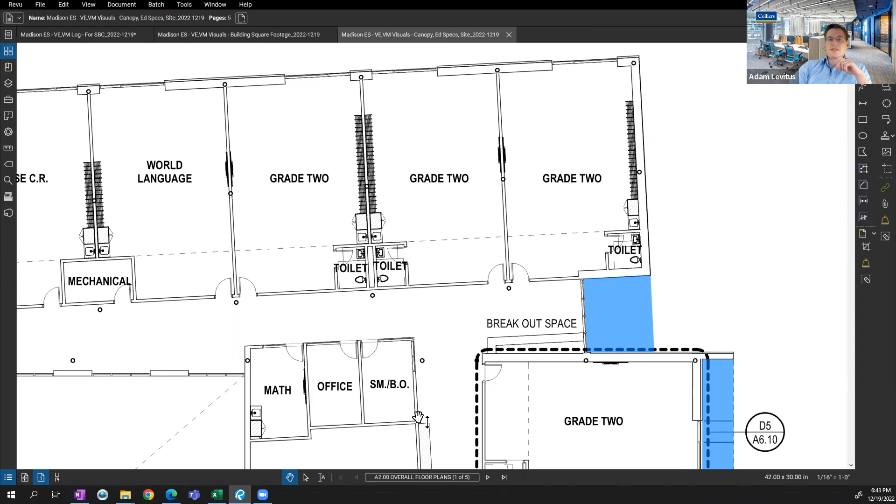So the value as part of this VE item is strictly for the reduction in fixtures. So the value is just to have these basically become one, and have one toilet, one sink. There's also a potential through the design development exercise to have these more consolidated into the gang style bathrooms that you have for grades 3, 4, and 5 on a different floor. But for right now, the value that was intended to be taken was more conservative, just eliminating the fixtures. Probably didn't do it full justice, if Justin or Jeff want to talk about it more in terms of what the potentials could be, but that's the notion behind this particular VE item.

I personally think we don't get rid of them. I mean, I understand maybe doing one toilet, one sink for two classrooms, but I think at that grade level you want them accessible from the classroom. Which is what this VE item reflects in terms of the value, as of right now. Yeah, I wouldn't ever entertain doing less than that.

Any questions, comments? Otherwise it sounds like, mark this as accepted with the notation of not trying to explore a centralized gang bathroom for grades 1 and 2, and just keep it accessible from each classroom, but just one toilet, one sink from the classroom. Is that my hearing?

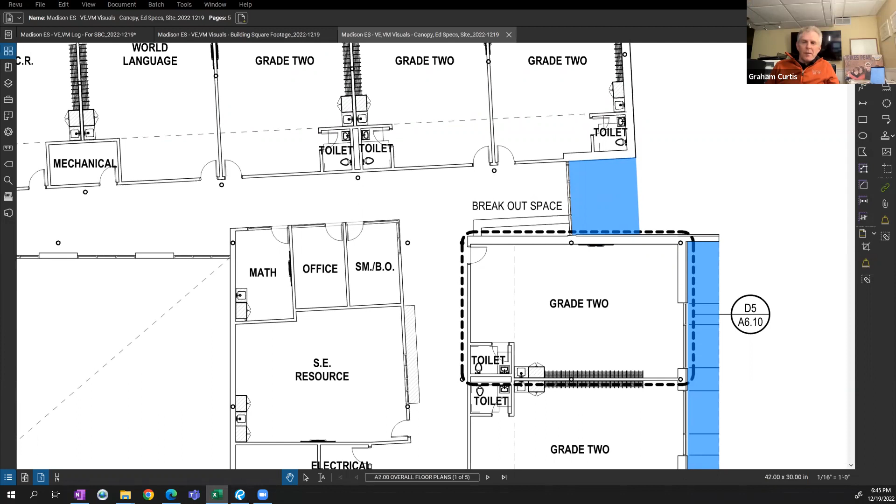And that's a Board of Education item anyway, right? That would still require Board of Education approval because it's not a dedicated restroom for each classroom. Yes. Okay.

Moving on, now we get into some of the site plan items. There's a fair bit of money within the site for exploration.

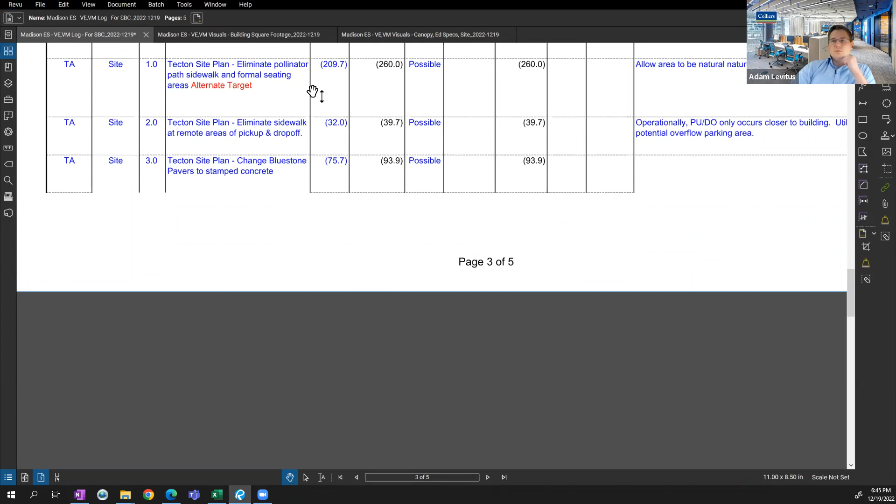The first item, and this one's one of the ones that was targeted as an alternate, is for eliminating the sidewalk and formal seating areas for the pollinator path walkway. So on the site plan visual, that's item number 1 that kind of loops around the turf field and back. The idea is that it would be a more natural walk as part of base scope, and then as an alternate, there could be paving and things of that nature to go around with seat walls and something more built up. But as a minimum it would be just a natural walk. Would we have—I think there's an ADA requirement potentially if we have spectator areas down there?

Possibly. We talked about this with the landscape architect as well. I think where we get into trouble is where we create these formalized paths all the way around the entire field. And I think we can get proper accessibility to the field and equal access. But I think the orange shaded area is something, it's a bit aggressive.

You don't need that much. You might need just one side. The pollinator gardens, that's a big plus for the land trust people, so I don't know, just taking out the path and the pollinator garden, or just.

It could be something we could work with the land trust to develop a natural path that we could share. That's exactly what my suggestion was, to make it more natural. There'll be a kind of graded and paved area near the play to get you equal access to this area, and then maybe it's more of a natural walk, and then the outdoor classrooms can still occur. They just don't need to be as formal as they were designed.

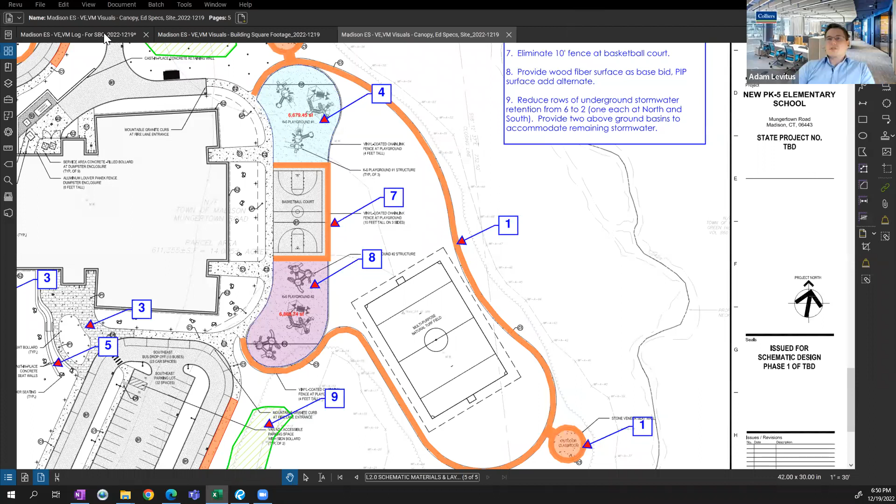I mean, while I'm looking at this, to your point, Woody, that's more or less what we're doing. Is, for example, this pollinator path is taken out of that project budget for that $9.9 million difference. And so the more that we can push as alternates or in later VE items, the more that could be considered by the town for later work.

Point being is that value is already part of the 6 million that we're talking about here. So anything else would need to be on top of that if we're trying to offset for geo, for example. Yeah, that's why I asked what else could be done. I mean, I knew that 200 grand wasn't gonna do it.

Yeah, I assume we could take the ball field as an alternate. I don't think we identified the ball field as an alternate. It was shown in all the things shown to the public. It does reference fields. To be honest, I don't think we're going to solve this on this call in terms of diving into what it's specifying. But that's something we can look into. So I can flag that as an item to circle back on between now and the next SBC meeting.

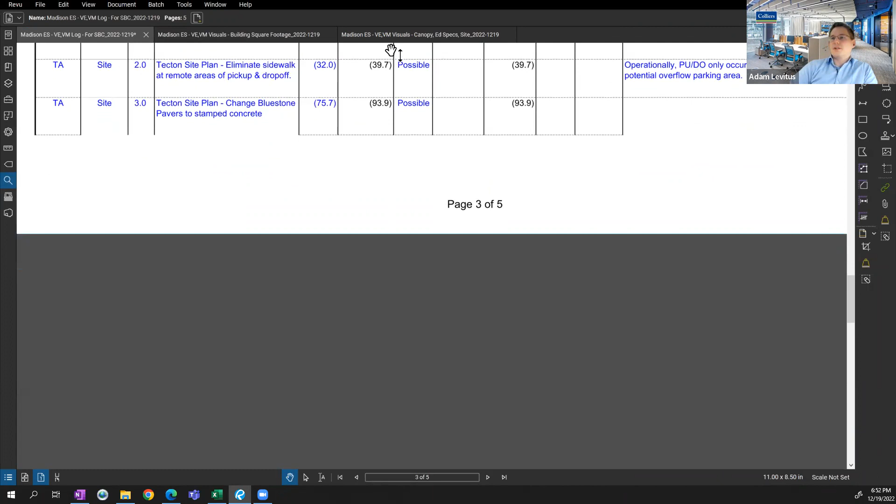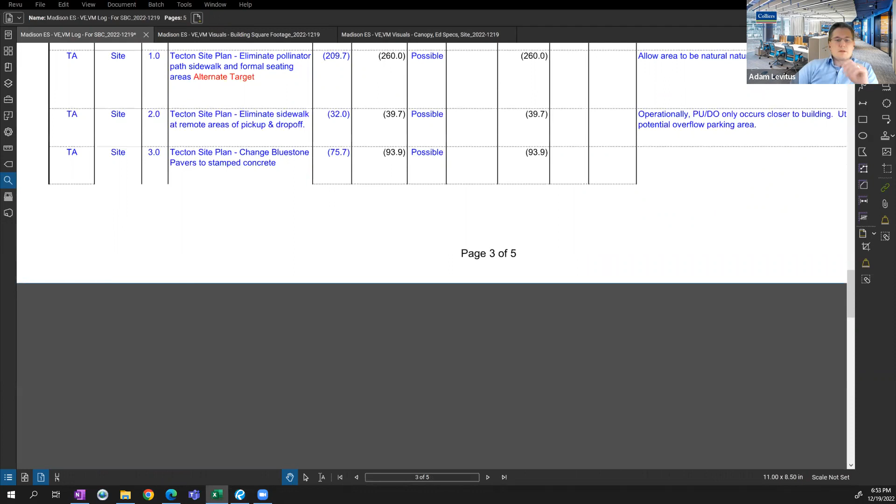Next item is eliminating sidewalk in remote areas of drop-off and pickup. The notion here is that the pickup and drop-off happens closer to the building, so having a full wraparound sidewalk to the extent it was originally shown didn't seem necessary as part of the VE take. So it's these orange areas here. I forget if there's one up top here as well. Yes. Questions on that item? Okay, mark that as accepted.

Next one, the infamous bluestone pavers. That was at a number of locations, at some entrances and at the courtyard. So the cost delta there is to provide just stamped concrete, so it still maintains some aesthetic appeal, but at a much reduced price. Is there any other questions? I assume we could go to plain concrete if we had to, a few bucks a square foot reduction, further reduction. That's correct, yeah. And you could also color it.

You can put a nickel color in there and then still save a few bucks. But we're all not sure, so we'll take the bluestone out, which is a nice feature, but I'm sure maintenance wise, the long-term longevity of the bluestone in a public school probably might be a little problematic anyway. Potentially for the stamped as well, yeah.

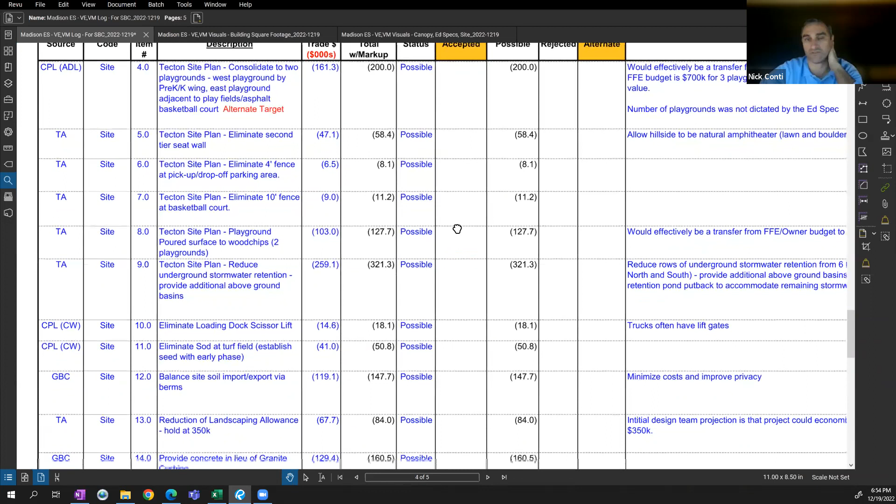All right, so another item that's for an alternate target. This is for consolidating from 3 playgrounds to 2. The ed specs didn't specify a number of playgrounds, just that there were to be playgrounds. So on the original SD plan, there were 3 playgrounds shown. So the idea is that there would be a younger playground area and one for the older kids on the other side of the building, and that as an alternate, it would be included as a bid, but not part of the base bid scope for the playground here.

This item was an FF&E targeted item, so not necessarily within the main construction scope. So what would happen is if the town chose to go down this route, inevitably there would be a shift in money from some of the owner provided items or separately provided items to the construction budget to help offset some of the difference. And again, this would be targeted for an alternate, so it'd still be designed out. Okay, yeah.

I assume it's desirable to split them and have different age groups, not mixed, but it's a K5, right? So probably not that much of a problem. It was something that came up in our reviews to have a lower pre-K and K playscape, lower elementary, upper elementary. So different types of playscapes between grades 1 and 2, and 3 through 5. Got it. Can it be combined in one play area at different levels, or is that too complicated to control the kids? That is what was, I think, originally contemplated in the ed spec.

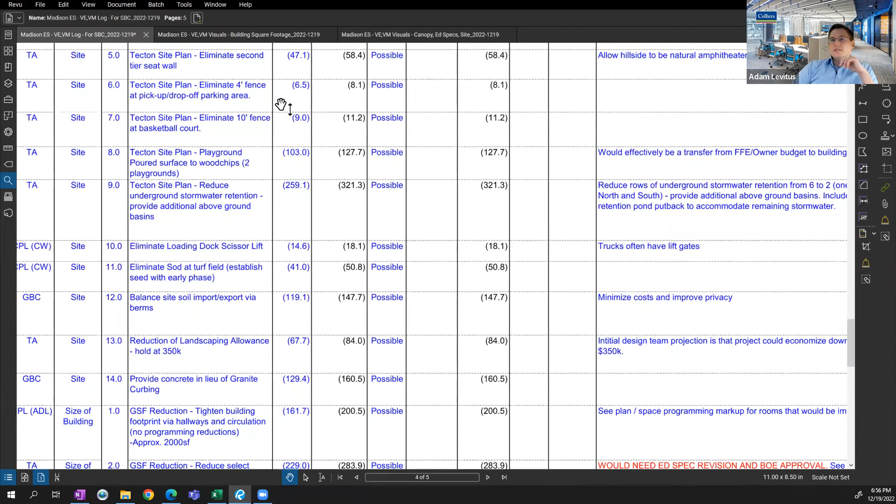Okay, next item is eliminating the second tier seat wall and instead just utilizing the hillside and some lawn and boulder seating. That is at the south main entrance here. It's sort of a terraced approach, and the idea is to eliminate just the second tier of it, so that would still leave this first tier.

Nice feature, but I think we've got to give something up, so I'm okay with cutting it. It's still got the slope, so you get 90% of the effect, in my opinion. I would agree.

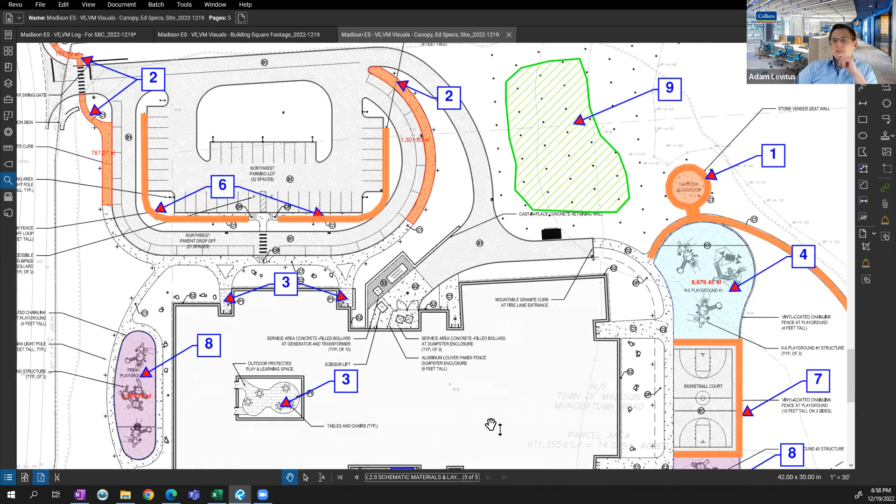Next item, kind of two items. Eliminating some fencing: a 4-foot fence around the pickup drop-off area and the 10-foot fence at the basketball court. I know there was some review with regard to extent of fencing, purpose, etc. Around the basketball court, this would be the 10-foot fence, and then there's some fencing around the parking area, but still having the drop-off in between the parking and the school. I don't think there was parking up here, so it's just these two areas.

Is the short fence intended to avoid people running across the bus loop, I assume? That was the intent of that short fence? Yes, for parent drop-off, same thing. But it can be handled differently, more economically, with landscaping.

Moving on to the next topic: playground poured surface to wood chips. This is an item for the playgrounds contemplated through the separate owner-side furniture, fixtures, equipment scope. The idea is rather than have the poured surface, instead replace it with wood chips.

I know there's been some pushback on this one just from a maintenance standpoint. Wood chips, as soon as you start playing with them, they get everywhere, and it's not as clean and tidy as the poured surface. So this one also maybe could be an ultimate target.

Is that based on 2 or 3 playgrounds? This is for 2, so it's separate, assuming the other one was already taken. This is just for the 2. The poured surface is expensive, but it is a nicer, longer-term solution for sure.

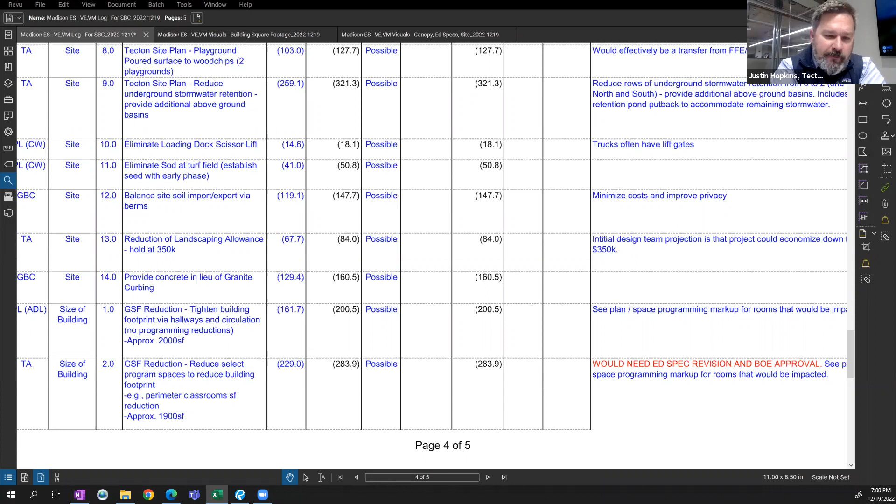My experience is with 3 of them, one not ours, but I saw it going in at the same time as the Town Campus Learning Center. It's really about the quality of the construction. The one that I saw that wasn't ours held up really well, and I was impressed with it versus the one we put at the Town Learning Center — we spent a little time and money always fixing it up and maintaining it. It's been in probably 20 years, and we've replaced sections of it once and done some significant work on it twice in the last 20 years, just off the top of my head.

The one at Brown School is holding up really well. I think it's 3 years old and doesn't look at all like it needs anything — it's in great shape. But that was my understanding: every 5 years we need to maybe recoat it and check it to make sure it's maintaining properly. But I think installation is the key. I would estimate five-year heavy maintenance, ten years consider replacing it, but I think it would last longer. I don't know that for sure — I didn't look at the manufacturers or do any hard analysis. It's just my estimate from seeing them.

What's the maintenance factor on wood chips? Wood chips, we have at all our schools. Off the top of my head, we spend about 2 to 4 or 5 grand every year putting in more wood chips as they decompose. As long as we take care of it and maintain it, it costs between 2,000 to 5,000 a year — we put in wood chips and rake them in. And obviously the wood chips move.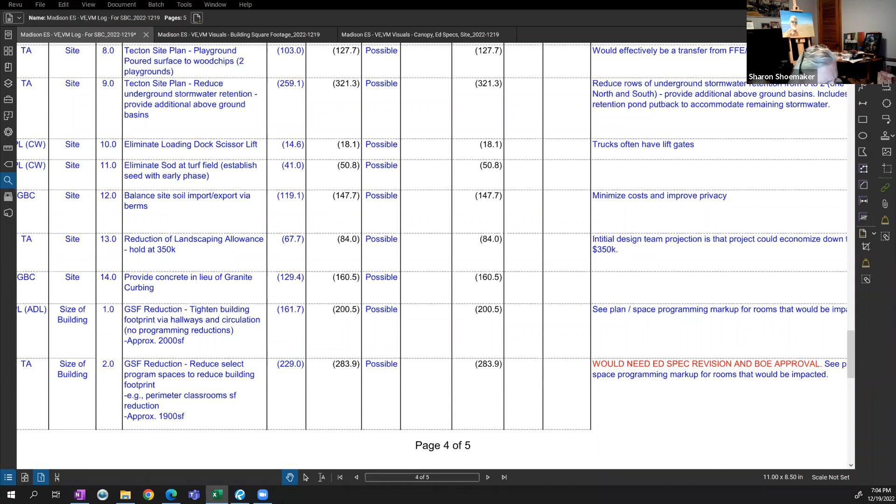Sorry, I'm chiming in for the first time on playgrounds. But I agree with Bill in terms of the importance. It is at Brown already, and it is much better for ADA compliance, so a student in a wheelchair can access the playground much better when it's the harder surface. So we'd really like to keep that in if possible. So would I. Thank you. Whatever that's worth.

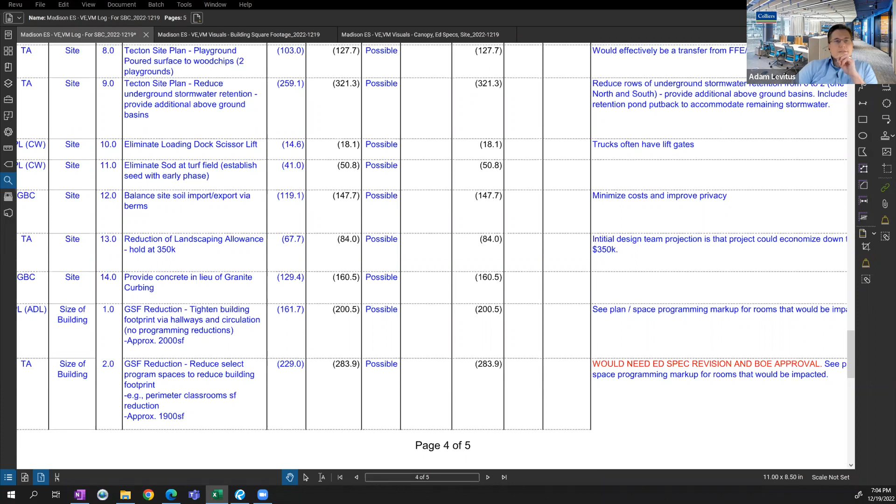There'll be some naming opportunities later on, Sharon. Am I hearing mark it as an alternate then and not reject it? Yeah, put it as an alternate. I think it makes sense. Thank you.

Okay, next item is reducing underground stormwater retention and providing additional above ground basins. So there are a number of stormwater components where the water just goes underneath the ground, underneath parking lots and things. There were 6 such retention devices. Tecton coordinated with their site designer and identified that they could eliminate many of those and instead just provide an above ground retention pond, potentially just above where the geothermal wells would theoretically be. That would result in a pretty substantial savings, 320 grand.

Just curious, how deep is that retention pond? Would have to be a few feet to make it worth building. You need 5-foot coverage over the geothermal field, so as long as that works, I don't know. They haven't been designed yet, but the intent would be that they'd be shallow basins because we obviously don't want standing water in any of these.

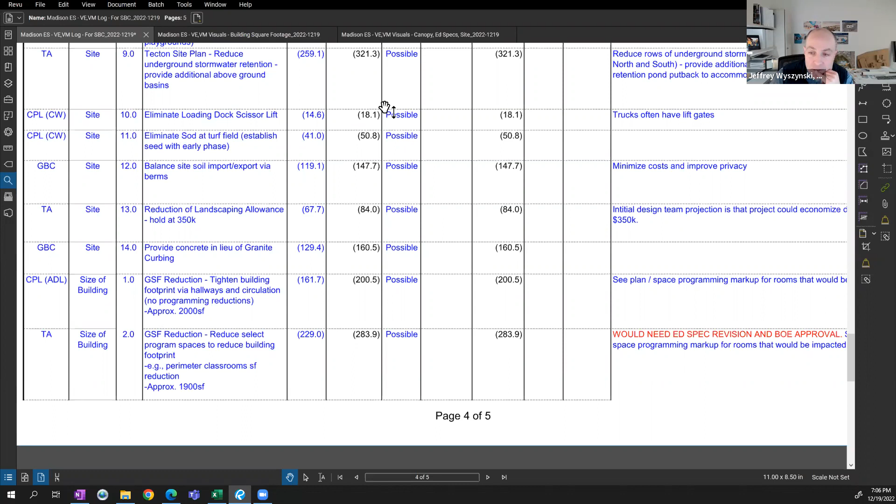Okay, yeah, it's subject to approval by the town engineer through the planning and zoning process anyway, so I think we can target it and figure it out. The general concept was to get the stormwater out of underground basins that cost a lot of money. Understood. It'll be a lot easier if we take the value engineering on the geothermal wells, obviously, but we'll have to work a little harder. All right, I'll note that down. That's accepted, we can move on.

Loading dock scissor lift. So right now the drawings contemplate having a separate mechanical scissor lift next to the loading dock. Trucks often come with their own lift gates, so the savings would be for eliminating the scissor lift. Bill, I don't know if you wanted to chime in on that.

We don't have them at any of the other elementary schools. The only place that we have a half dock is at the high school and Polson, where we have a full dock. You know, we deal with it at all the other schools. I don't know why. Actually, Brown School has a loading dock, so you know, we can handle it.

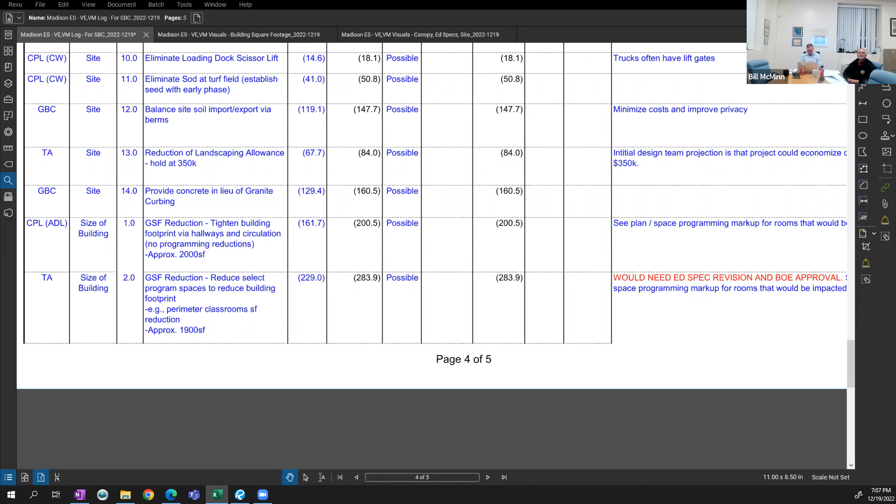Okay, take it. Next, eliminating sod at the turf field and instead phasing it such that it could be established earlier on with seed. This is separate from the potential for deferring the field altogether, which we need to look into, but even with just maintaining it in the project, just having it be the more economical seed establishment versus sod.

Could be an alternate, depending on season, timing, but yeah. I can mark it an alternate if you want. As opposed to eliminating it altogether? Yeah, that would be—I mean, if we would consider taking it, it'd be just taking it right away and having that be the basis versus having it be a separate line item as an alternate.

Generally don't want to have too many items try to be alternates, in which case I just wouldn't include it as an alternate. I don't think it's that important. No, I mean there's some sod around the building timing-wise, but yeah, I think you can actually get a better feel if you grow it from scratch anyway. At least that's what experts will tell you. All right, I'll mark it as accepted then.

Next item, this is more of a site balancing item. During the estimation process, estimators did their cuts and fills and noted that based on the schematic design plans, there would have been some amount of import or export. So the notion was to better balance the site, which could result in higher berms around the perimeter, also helping address privacy concerns. There's a double positive here: cost savings and better enclosing the site with natural soil on hand.

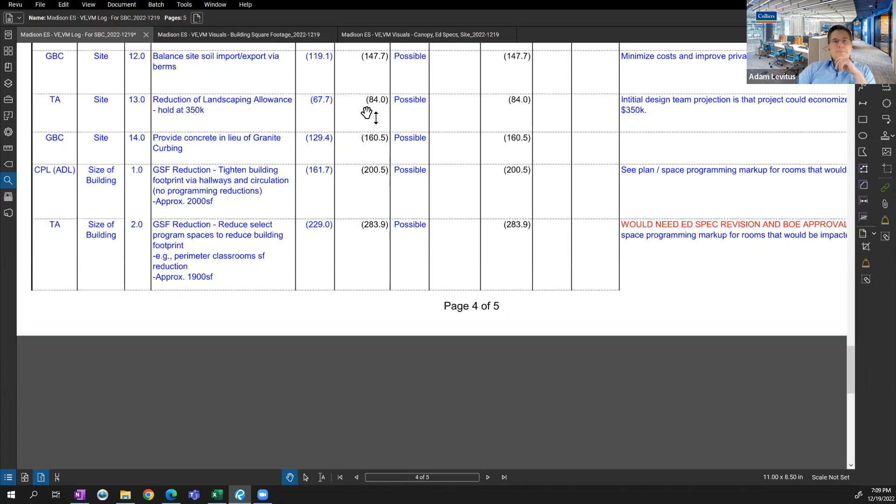Sounds like a great idea. Very good, all right, accepted. Next.

Reduction of landscaping allowance. I posed to the design team how much planting we needed as part of the base scope. The idea is to cut off a bit of the overage and bring it down to an allowance of $350,000 in design landscaping. Not a huge wholesale change, but some additional money there. Does that include turf establishment, or just plantings? This number, I believe, was just from plantings, not including the sod.

This was a tacked-on item. Gilbane priced it out, so they should confirm what that includes. Yeah, I believe that was plantings.

To Woody's point earlier, could that be something done after the fact with the rebate money? I don't know if there are any specific zoning requirements for planting. Sometimes they have buffers and things like that. I don't recall seeing them, but that would be the minimal we'd have to do if there is a zoning requirement.

Sometimes for islands and such, but I think we can reduce it, go lower. I think Bill would prefer to minimize the landscaping other than zoning. I'm all in favor of that. Landscaping is something we can't handle very well. Minimal landscaping, a few trees and some grass, screening the neighbors is something we want to consider, but we don't need that stuff around the building. It doesn't do anything for us other than cause grief and aggravation. So I'm all for minimal landscaping, I can't say that strong enough.

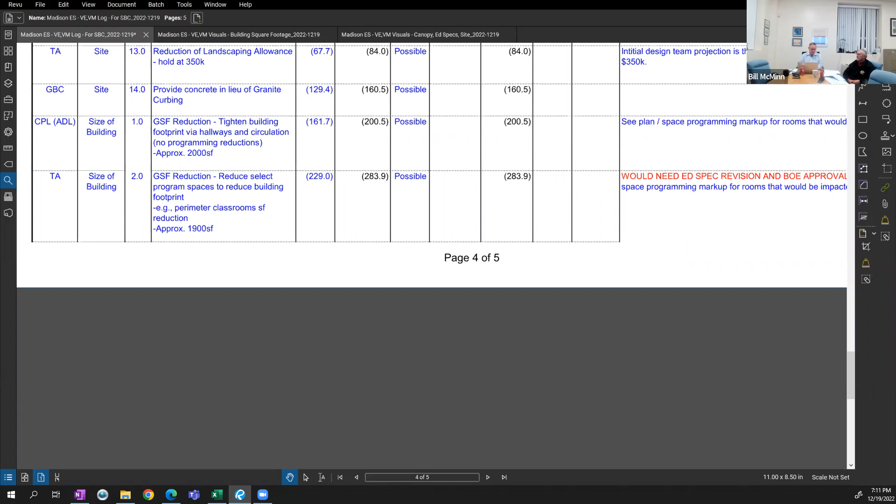Yeah, I agree with you, Bill. With the allowance I identified, there'd be some fodder there to still work through the wetlands area. We definitely want a pollinator garden, but I think 350 would buy a lot of plant stock, which is why I'm wondering if it's more comprehensive, maybe including topsoil or something, just to see what's in that 350. That's a lot of plant stock for an elementary school. So it sounds like we accept it, with maybe more room later. For now, minimally accepted and targeted for more. I'm sure the landscape architect hates to hear that, but the high school planted up pretty good, I think we got enough plantings there to last.

All right, coming down the home stretch here, last site item. There was granite curbing identified in the schematic design phase. This price is to make it simple concrete instead of the more expensive granite. It's a pretty good chunk of money there.

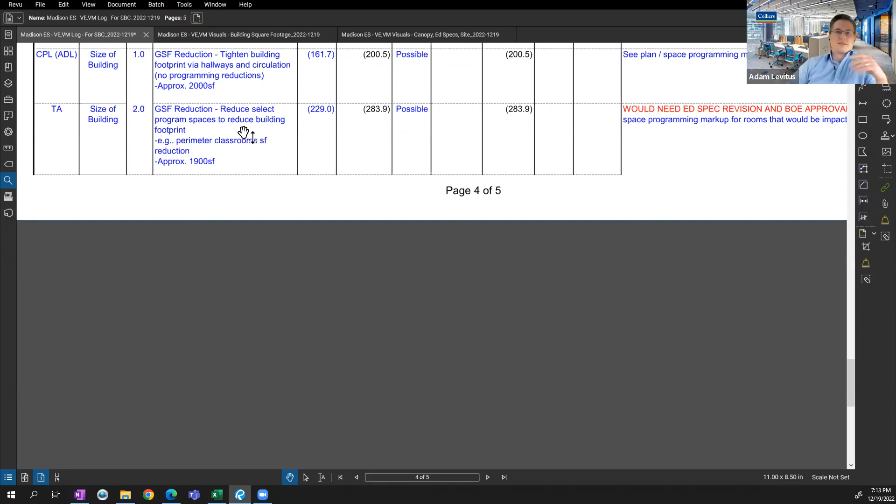The last two items are with regard to the size of the building. One portion relates to programming specs, another to circulation, so we'll look at these together when I pull up the plans. The first item is tightening the building footprint from hallways and circulation, reducing vestibule sizes and making some hallways narrower than in the schematic design process, about 2,000 square feet. The other portion, defined by the ed spec, is selectively targeting some perimeter spaces, predominantly classrooms, and reducing their sizes by bringing in the exterior walls. I'll bring up the plans here.

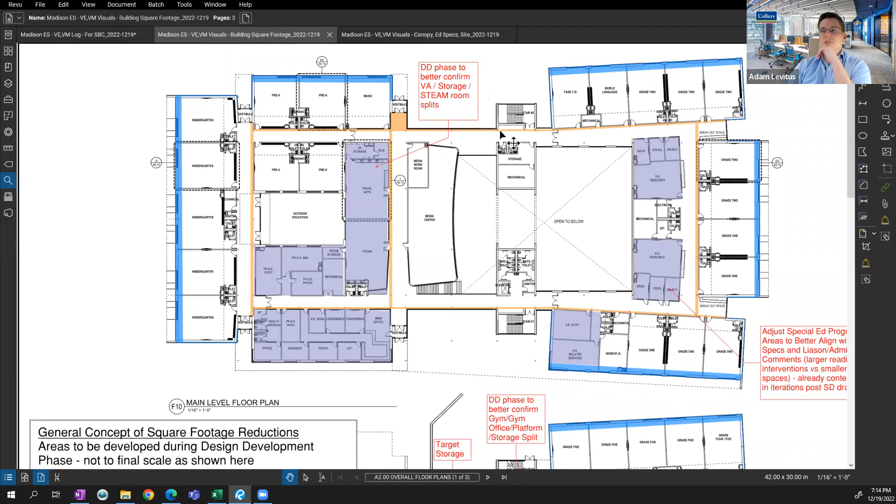What is the percentage of reduction in each of the classrooms when you do this? It varies, and I'll pull up the space by space breakdown here in a moment. You can see where those each are.

The orange areas are the circulation areas I talked about that are not programmatic in nature. Anywhere you see purple are items where some shifting is occurring, some already done to align areas we were missing in the ed spec or that need reconfiguring. For example, up at the cafeteria area by the faculty dining, there was some extra square footage and a shortage of storage.

Those would be areas targeted to meet the storage requirements of the ed specs. Tecton's already been working on this since schematic design, so this faculty area in the current plans already includes a storage area to meet that difference in square footage required by the ed specs.

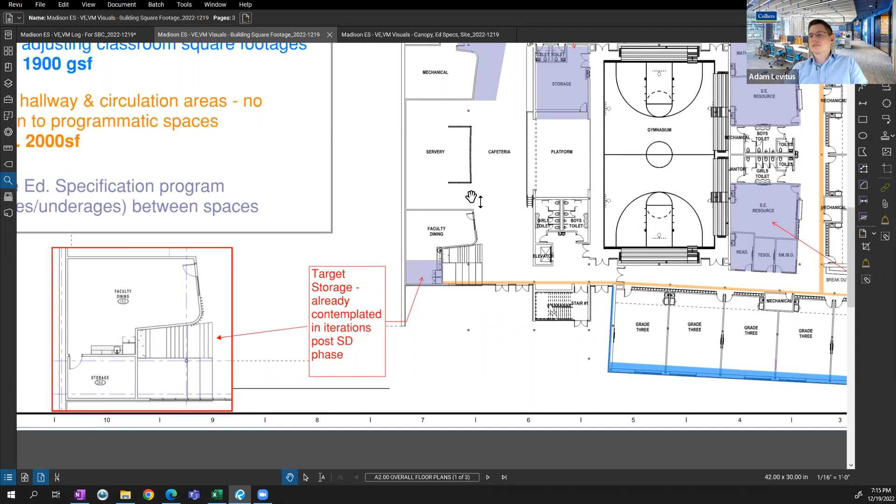Going on to the room by room breakdown: for full day kindergarten, ed specs had an 1,100 square foot programmatic requirement. The target would be 1,000 square foot, so just under a 10% reduction there.

For grades 1 and 2, going from 940 to 850. For grades 3 to 5, 890 to 850. Some adjacent spaces: the music choral room already targeted at about 950, with some storage areas going from 1,000 down to 950. World language classroom 890 to 850. Pre-K from 1,000 down to 900.

Then some attendant areas impacted, one coming out of discussions with teacher liaisons and administrative working group meetings. The school psychologist's office and main office area were targeted for potential gross square footage changes, where the front secretarial area would shrink a bit but the pre-K psychologist office would expand to make room for extra staff identified by the principal or potential principal.

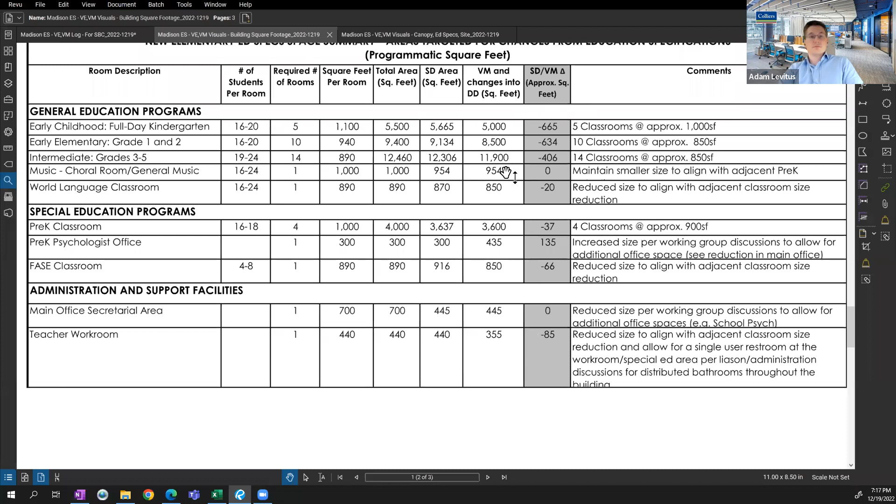I was going to ask, are the functions within each room, as far as number of students and all the things they need to teach and do, still fit? It's just extra floor space that's getting removed?

I can let Justin and Jeff talk about that more in detail, but there were other potential square footages considered. We weren't sure if kindergarten could go down to 900. These shook out as a higher value to help accommodate some of that. I don't know if Jeff and Justin want to expound on that a bit.

I can speak to the kindergarten. We looked at 900. We wouldn't advise going down that low. We think 1,000 is appropriate based on the various different uses you typically see in pre-K and K.

The elementary drop for grades 1 through 5, with the square footage reduction, you can still perform all the same functions. It offers a little bit less flexibility, but you could still perform all the same functions in a slightly smaller classroom. We see on average classrooms for these grade levels range from the high 700s to 850, 900, and they all seem to function across our projects, so we think we can get those functions to work.

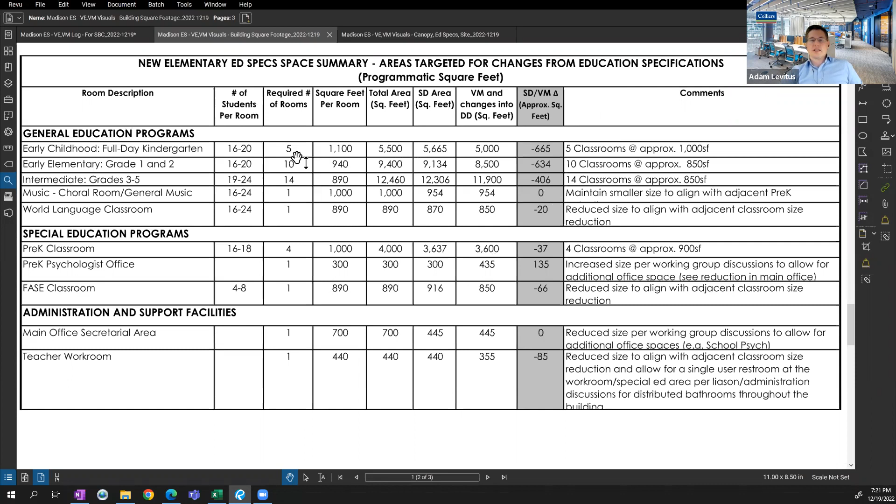So this item, because it's a pretty substantial change, and because we have another school building committee meeting that we'll need to get to finalize this entire list, particularly with geothermal, I don't know that we need to decide anything tonight on this. Point being, this was a key topic and a key focus that was presented to the Board of Education last week, so they're aware of it. Obviously they didn't vote or make any clear indications one way or the other, but this was the classroom reduction sizes, the exterior walls getting brought in was the concept shown.

Can you go back to the slide with how much money this saves us? So between the two, just under $500,000.

Do we lose anything significant with tightening the hallways in regards to it as an educational space, or is there a value between the different sizes?

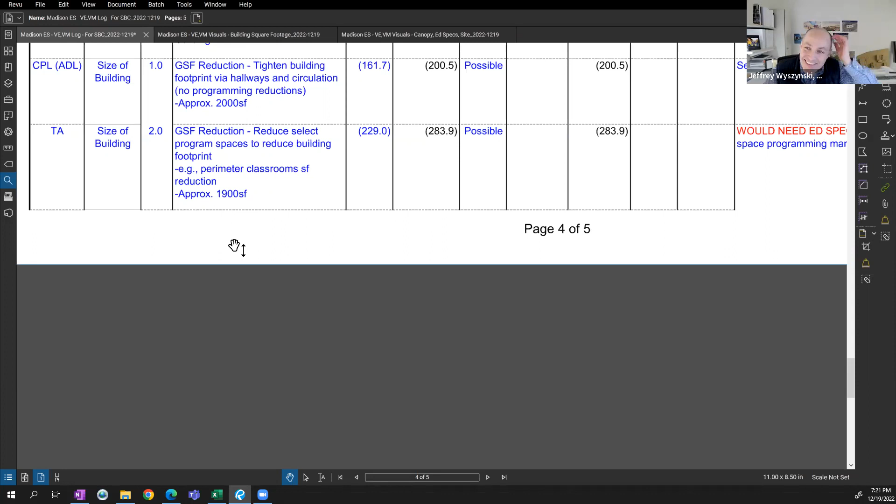I'd look to you on that one. We set up the plan for what we think is the optimal kind of spacing, so they were set up on a 10-foot grid line, so you had 9.5 feet, almost a clear space down your hallway. When we've done other projects in several other schools where you'll see that tan or orange color, they are that size and they still function just fine. There's still these pockets of opportunity for breakout spaces within the building layout that we wouldn't likely lose. So to answer your question, is it the optimal where we started? No, where we started is what we show. Will it work and function well and feel appropriate and service the school fine? Yes. Nobody's going to say, oh, I wish I had that extra foot. Well, I will, but I wouldn't say that out loud.

I think the way you designed the hallways and the skewed portions of the building actually lends itself to taking out space, because you do have more space than in different areas of the hallway, and I think that is nice that you did it that way. I don't want to share all the secrets, right Shannon? I agree, I think there's plenty of circulation paths here to not worry about capacity issues, I guess.